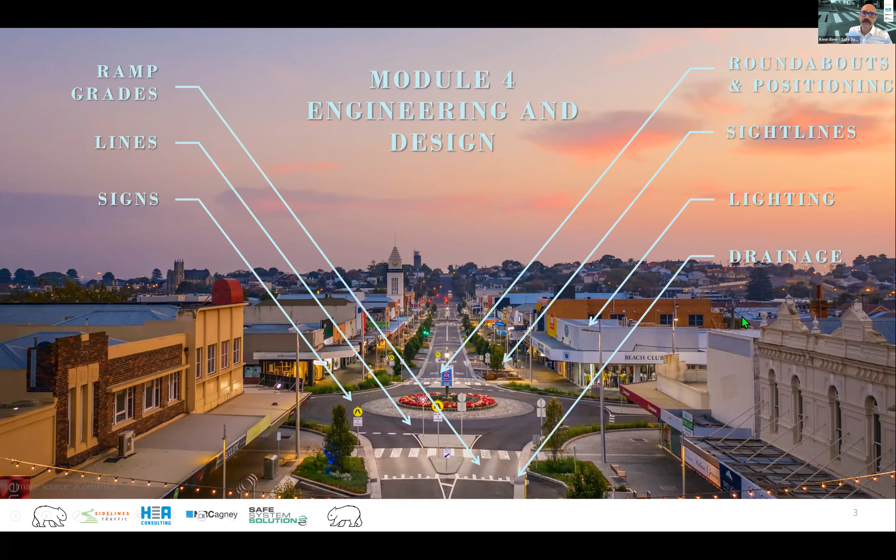Okay, so overarching, and this is a bit of a reminder of what my three colleagues have beautifully outlined there. In general, our design objectives are to locate crossings on pedestrian and cyclist desire lines, and that they serve the road users through efficient and effective crossing. We want them to be able to be traversed by all path users. We want them to have high alignment with safe system principles, and we want to consider it at that network level. So there's a sort of your design objectives.

But if we get into design principles, this is where I start to challenge industry on often. And you'll see there, I start with severity, and that's been a massive change in my career. I've been doing road safety audits for 20 years or so, and I used to look at the road network solely from a likelihood perspective, or not solely, but almost solely from a likelihood perspective.

I'd be saying, oh, we've got the right sight lines, is there a see-through effect here, you know, is the lighting right, and all of these things. Right, but transitioning now, I'll be looking at the whole road network on potential energy. So I'm saying, okay, what's the speed here? What's the vulnerability of the user? What are the angles that these crashes could happen at? That's the first thing I'm thinking about, right?

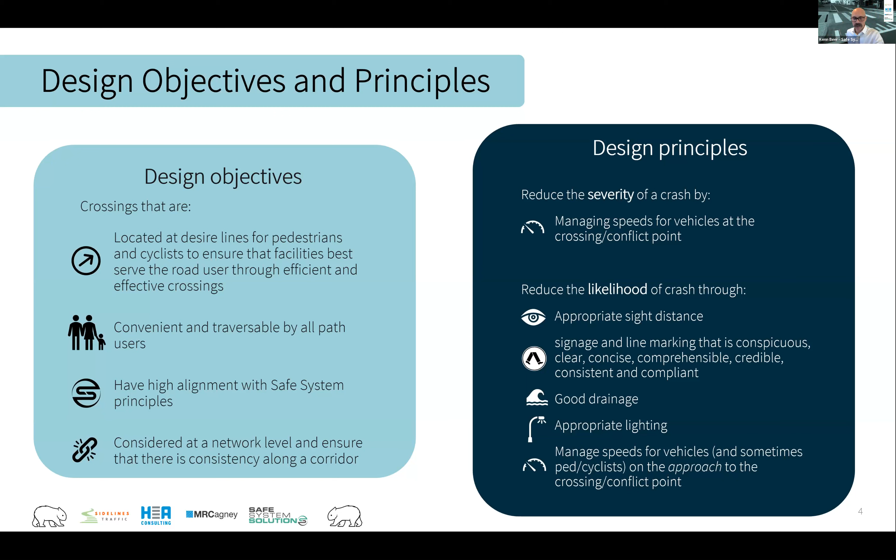So I'll be taking you through those design principles, and we will delve right into some of the detail here. And I want to start with sight distances. And I will start with a few probably thumbs up, thumbs down style things.

Let's start with this one. Okay, it's an at-grade crossing. It's not a raised crossing, but give us your thumbs up, thumbs down. Now you can do that with the icon or the scary face. If scary face is your thumbs down, or you can type it into the chat, whatever works for you.

Okay, this is interesting. Yeah, it looks like maybe like 60-40, 60 negative or more negative as we go by. So we've got two lanes going in that direction, so it's two carriageway. Oh, okay, we've got a lot of scared faces at the end. Yeah, people. There's some sort of thing going on, maybe when I said there's two lanes in that direction.

I suppose the good aspect, some people are saying there's some good, I mean, it's got lighting. The lighting's pretty good there. It is a pedestrian crossing as such. But as a few people are pointing out there, the thing that we always get concerned about with these multi-lane...

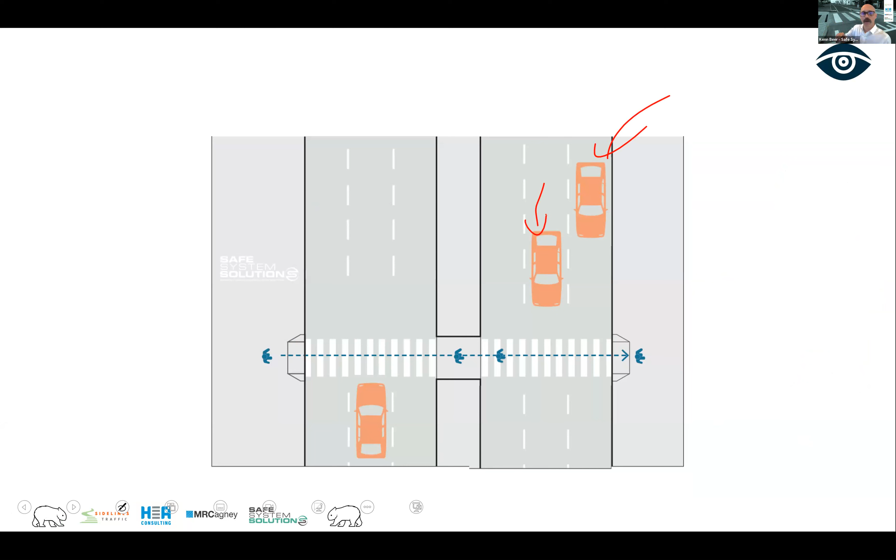in the same direction, and I use this diagram to try to explain it, is we've got... if we're thinking about this car here and it's approaching, and this car slams on the brakes because a pedestrian is crossing from the middle, we've got a sightline impediment there. Dynamic visual obstruction is what we'd call it. So that vehicle blocks that sightline.

If they're slamming on the brake and the pedestrian is walking past, we don't have the open sight lines that we wanted. Now, the Australian Standard does talk about this and says we shouldn't have pedestrian crossings on multi-lane roads like this, but it is done in jurisdictions, as you saw there. Queensland seems to have quite a few of them, and certainly there are ones in other states as well. So it's an interesting one.

But let's have a look at this one. Again, we've got two lanes in the one direction, and we've got a pedestrian crossing there. Yeah, so it's another divided carriageway there. Let's see, thumbs up, thumbs down.

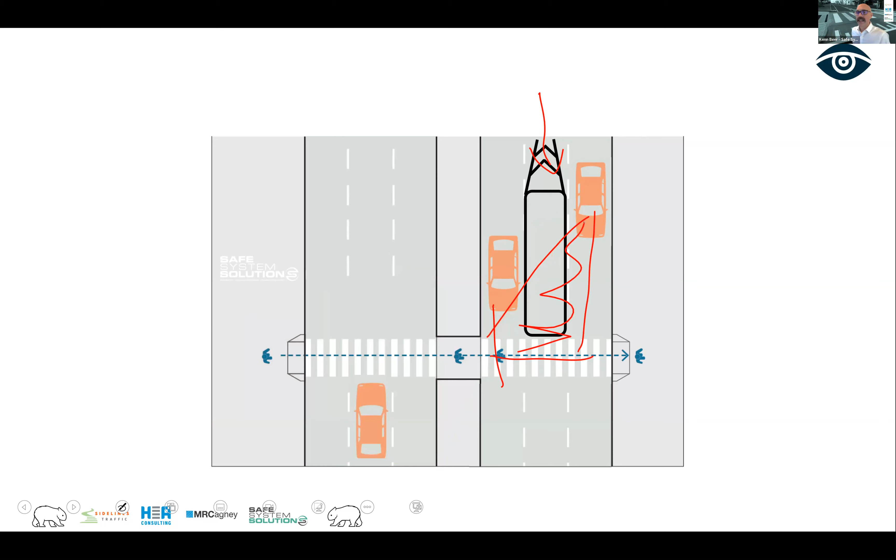The other beautiful thing about this one is the raised nature of it. We've slowed things down—there is more time to see, to react, and so your sight triangles are lessened. It's a really neat way to do it. That one's down in the Port Melbourne area, just near the pier there—Station Pier, is it?

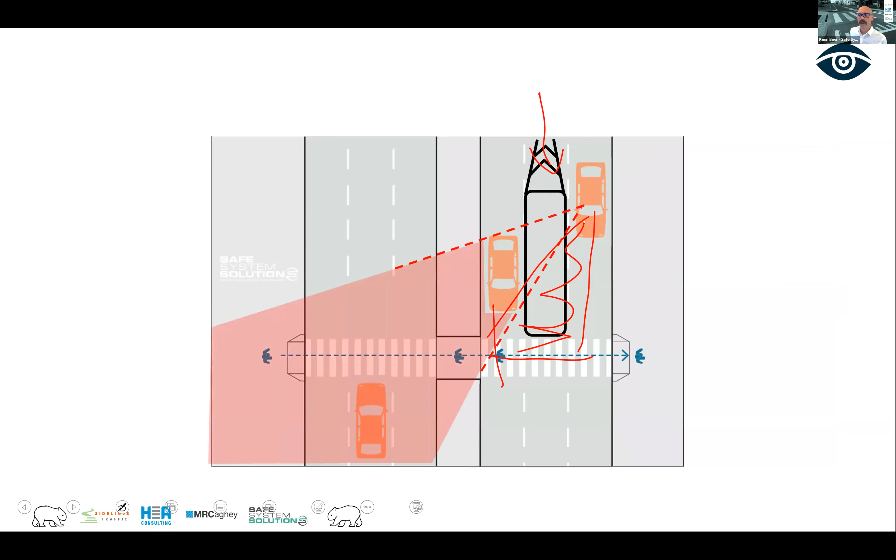Okay, let's keep moving on. Let's get into a bit of, I suppose, technical detail around sight distances to crossings. To do this, we want to take a few standard variables that we use in this.

A few things I'll be using a little bit later on: 1.2 meters a second as a walking speed—it's taken as a bit of an average walking speed. Now, you would adjust that hypothetically here—if it was a park and there was a path that led directly up to this crossing, you'd have to think, okay, there will likely be joggers and people moving along faster, so we might need to up that a bit. But this is kind of what we think about in a normal environment where there's a footpath and a crossing and these sorts of things.

1.6 meter setback is a really important number used in raised crossings or any crossing sight distance thinking. It's an appropriate point for pedestrian setback, and I'll come back to that. And I've got a 1.07 for height that we're thinking about for children or people in wheelchairs. It's very precise, whoever came up with 1.07, but hey, it's there—it's used in a lot of the documentation.

Now, here is what I'd say is a big common mistake, especially made by local governments. Designers will often simply revert back to this bit in the road rules that says a driver must not stop on a pedestrian crossing not at an intersection, or on the road within 20 meters before the crossing, 10 meters after the crossing. And they say, well, that 20 meters, as you can see down here, is there to open sight lines—that was the purpose of that road rule, so that's got to be fine. In New Zealand, for those logging in over the ditch, it's 6 meters.

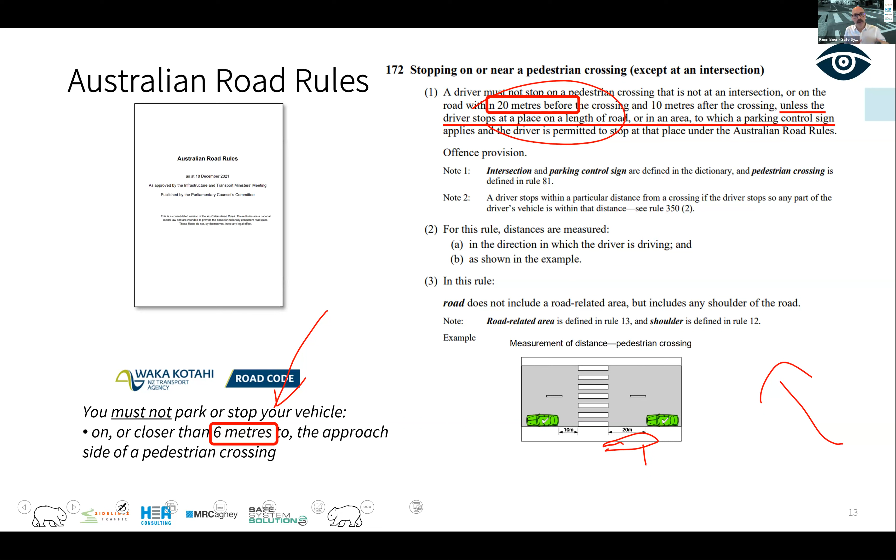So let me tell you how you should be doing it from first principles in terms of sight distance on the approach to different crossing types. You use your stopping sight distance calculations, or safe intersection sight distance calculations - same thing, just at a different height - SSD. You've got a vehicle approaching, you go 1.6 meter setback, and then you want to have that sight triangle clear. What distance back are we talking for that vehicle?

Well, that's going to depend, as per the formula, on what is the free flow speed, the 85th percentile speed. Let's say it's 50, maybe they're coming in at. Okay, we take our reaction time - I'll look at the environment we're in, but the bulk of the time it's going to be 1.5. Reaction time will be quick because pedestrian crossings are put in places where there's stuff going on. They're not out in the middle of nowhere where people have been driving for 4 hours, so reaction time is going to be good. So I drop almost always to 1.5.

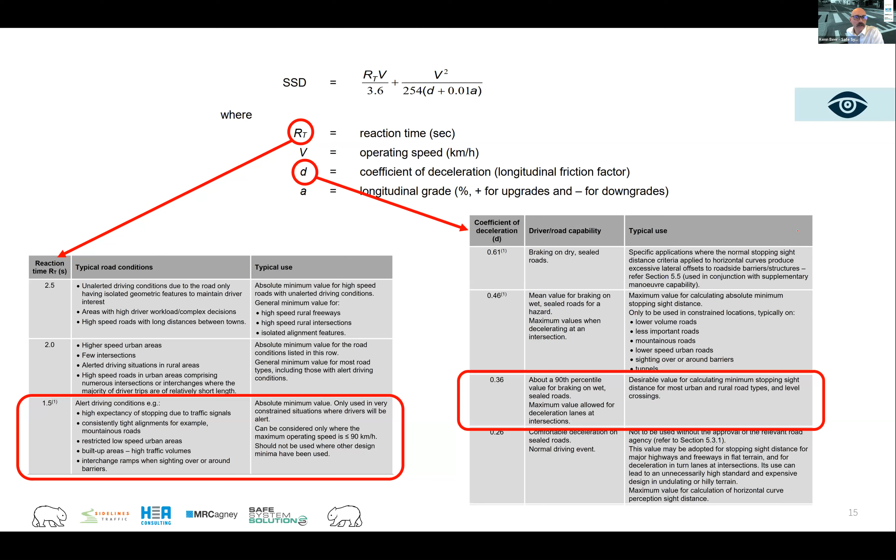In terms of your coefficient of deceleration, which is that other key choice you're making, 0.36 is good because it's factoring in wet road and 90th percentile. If you go less than that, there are situations where it might not give us the best safety potentially. So you've got those. If you've got a longitudinal grade, you'll factor that in, and you've got operating speed. So you plug that through your calculation.

And you'll see there that we then get, say, 48 meters at that 50 coming in. I mean, that's a fair distance, and you'll work out where you can put the parking then and the like. So that's how we do that.

But this is an at-grade crossing, isn't it? We don't have any raised elements to this. So how does it work then if we actually raise the crossing? Well, a lot of people just stick to this formula because there's not really a lot of other guidance otherwise. But that doesn't make sense. If you just stand back and look at that, you go, well, that doesn't really make sense, does it?

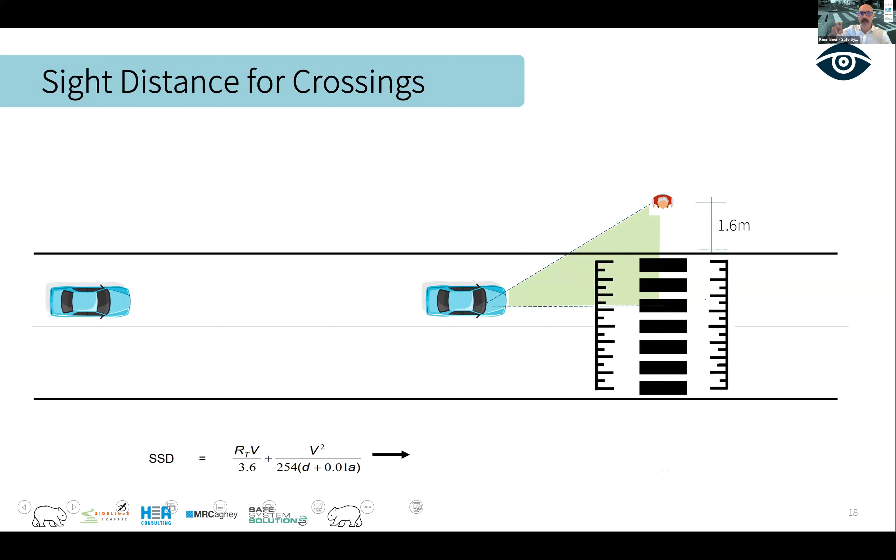Because that car will slow down. It's going to slow down because it has to navigate over what essentially is a speed hump. So what to do with that one becomes really interesting. So you can then say, well, okay, what about we take that distance and base that free flow speed off the ramp grade speed - the advisory speed we're putting on that ramp grade.

And then we're significantly going to shorten the sight distance calculation, or the distance, compared to our free flow speed back here. So you're able to really shorten up your sight triangles and hopefully get more crossings in where you may have said not to. So then you can see it's down to 17 or so there potentially.

Now, the reality of this - I've tried to explain this in a diagram here, where what happens is that a vehicle is coming in at a certain speed, let's say they're traveling at 50. ASD, approach sight distance, is ensuring that when that vehicle hits this point, they can see that they are going to potentially have to stop at that location, or they're going to have to navigate over this raised area. So we want to ensure that we've got that approach sight distance.

So they're going to process that information, and then they're going to start to slow down because they're going to have to navigate something where they don't know whether a pedestrian's there or not potentially, but they're slowing down anyway. And so we slow down, and then there's this point where they're going to make that decision as to, am I going to travel along at this appropriate speed now to navigate over this, or am I going to stop? And that's the critical decision making. Now, what happens at this location is the driver already has their foot resting on the brake because they are slowing down.

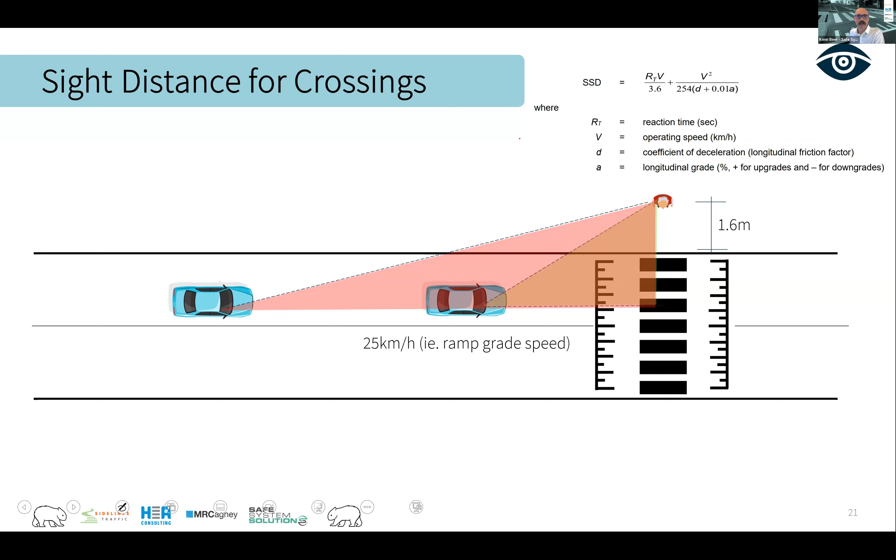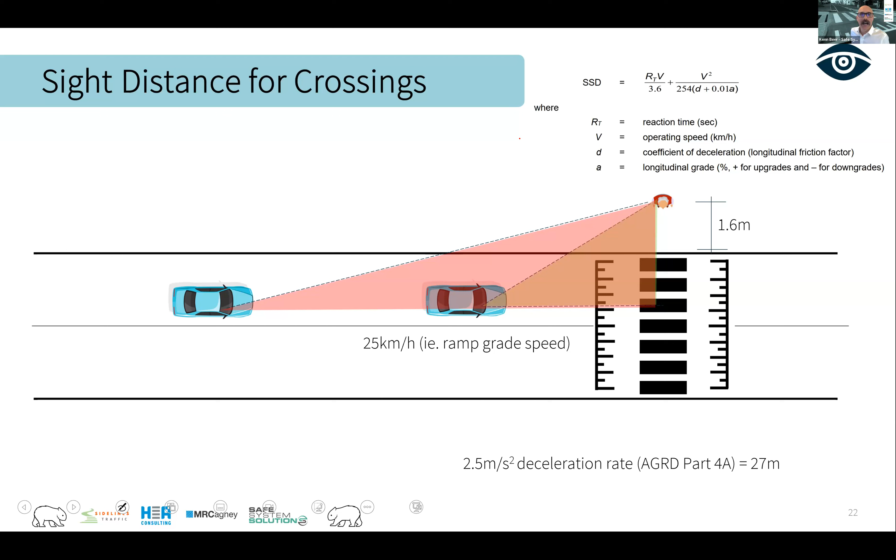It's all based on a 2.5 meters a second deceleration, which is out of Australian Guide to Road Design Part 4A. I don't need to go into that now. Okay, I'll take any questions in a minute there, Hafez, if they're coming in.

I just want to cover this off because some people ask, why aren't we then, there is a requirement to give way at this location, which in theory should be no different to approaching a road you don't have priority on. So why aren't we just looking for gap sight distance, like enough sight distance that this vehicle has stopped here, they're looking, have we got enough gap, and then I'll make my move. The answer is that people don't drive approaching a pedestrian crossing the way they do approaching a non-priority intersection. They approach it like it's a speed hump, and then they will make a stopping decision if the pedestrian is there that they see. I think that has covered that.

I'll pause there for questions, if there's anything I need to deal with.

100%. So SUVs, as you know, have been on the rise with several implications for pedestrians, so what are your thoughts on how that phenomenon impacts your design?

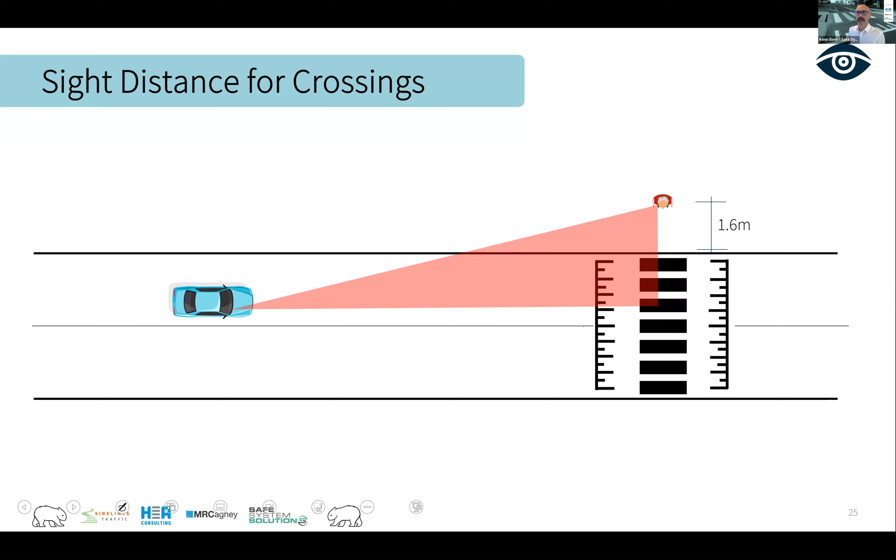One that came in very early, and I really love, is the curb outstand, or curb build out if you're in New Zealand. You immediately open up better sight lines, don't you? Because that 1.6 meters is all of a sudden pushed in as much as you possibly can there. So you're really able to do some wonderful things with those curb build outs.

But then I really do like these thoughts people are having about, well, hang on a second, I understand the principles you're talking about there. So if we could slow that vehicle, as Hafez said, we can slow them down earlier on, we can really get some good... we can tighten things up. Now, I will show you an example, a picture of that later. I thought it was the next slide, but it's not. I just want to cover off another principle, and then I'll show you some pictures of how you can slow vehicles on the approach.

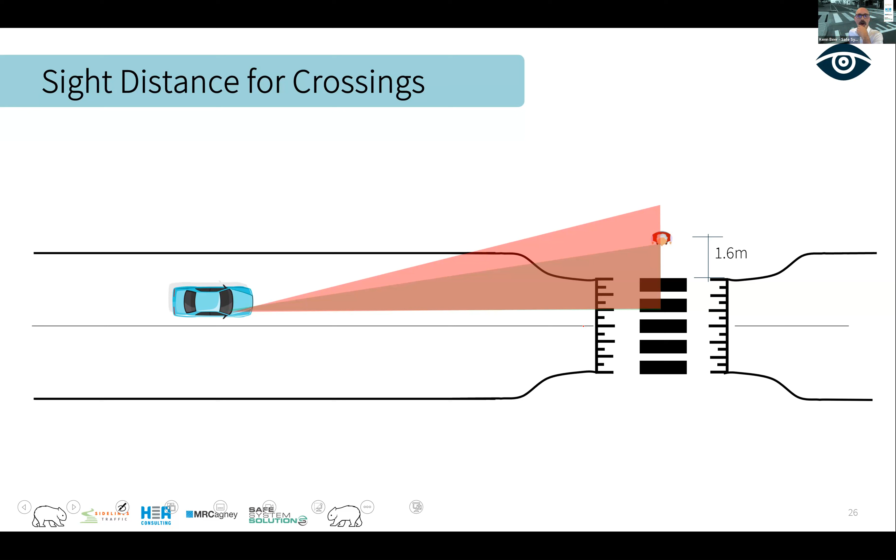And really great to see some of the ideas there, humps, cushions, narrowing the road even to bring operating speeds down, all good stuff. But here's, I think, an amazingly important principle that we can utilize design specifics on.

Okay, what we've been talking about there is sight distance for a vehicle to see a pedestrian. The pedestrian steps out, the vehicle has to give way. That's what a raised crossing is. In situations where it's not pedestrian priority, the vehicle has priority. What we use is crossing sight distance.

Now, crossing sight distance is all about a pedestrian having time to see a vehicle, pick a gap, and scurry across the road, and we take then that speed that we had for walking. So we've got that 1.2 meters a second as the walking speed there, and we've got our other detail in there. It might be say 65 meters or something like that with a 40. So what we're saying there is that it's actually this distance that a pedestrian needs to be able to pick their gap and move across the road.

So in these situations, we often cannot meet that where there's a crossing point, a pedestrian refuge, or these sort of things.

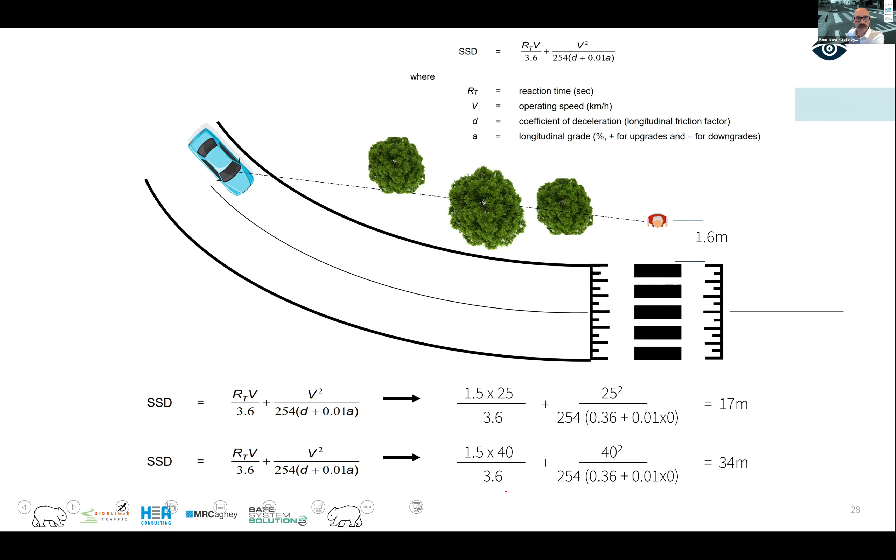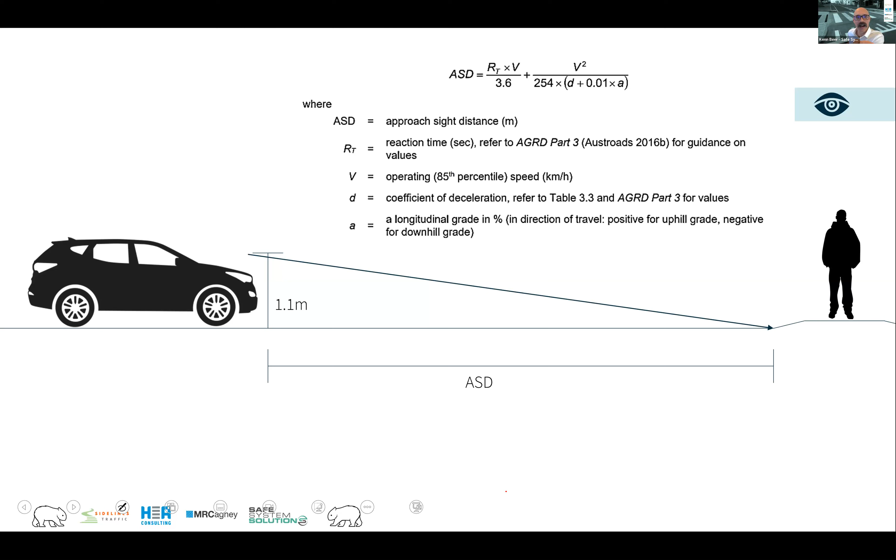If we put a pedestrian priority raised crossing in these locations, we can absolutely meet a lot of the requirements. We may not be able to meet the sight triangle calculation, but we can usually definitely meet approach sight distance, thus giving the driver the awareness that the crossing is there. So in these sort of situations, we're able to have that driver approaching realize that there's a crossing there, and we'll show you some other measures we could do to address the car.

So what we've done there is taken a situation where our pedestrian absolutely does not have enough time to look, to make a judgment call, to pick a gap, to scurry across the road, to a point where a vehicle approaching can absolutely identify that there's a crossing, knows that, has appropriate stopping approach sight distance. So we're in a much safer position by having pedestrian priority on a raised crossing than we are having pedestrians trying to make their own run across the road. Plus all of those other equity and things that Bridget talked about.

Think about old people, yeah. So it's a really big win, and we can really start to sort of justify that.

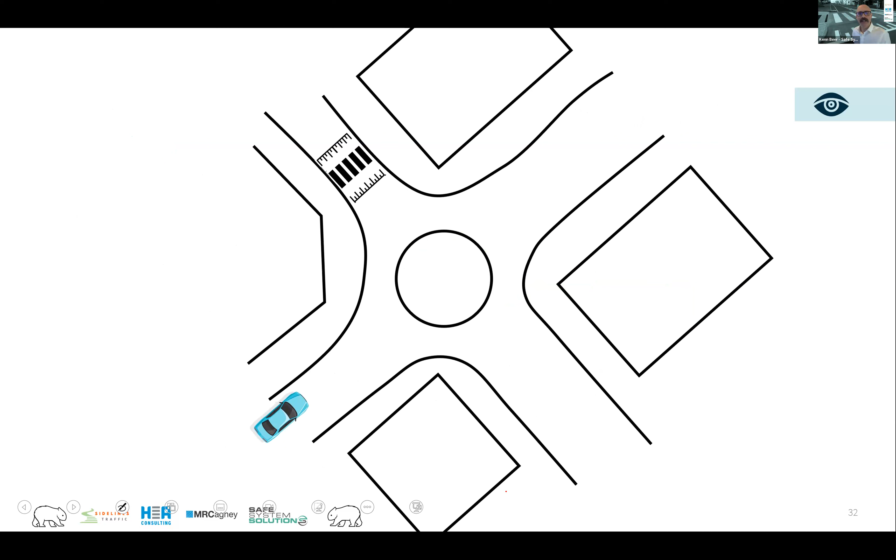Plus, the other thing is that you usually would do these in all approaches, which brings down that speed people are turning anyway. So I think that not meeting sight lines to a pedestrian crossing in some of these locations isn't a satisfactory reason, or you just got to calculate it and think about it slightly different to ensure we can provide this safe and effective access for pedestrians.

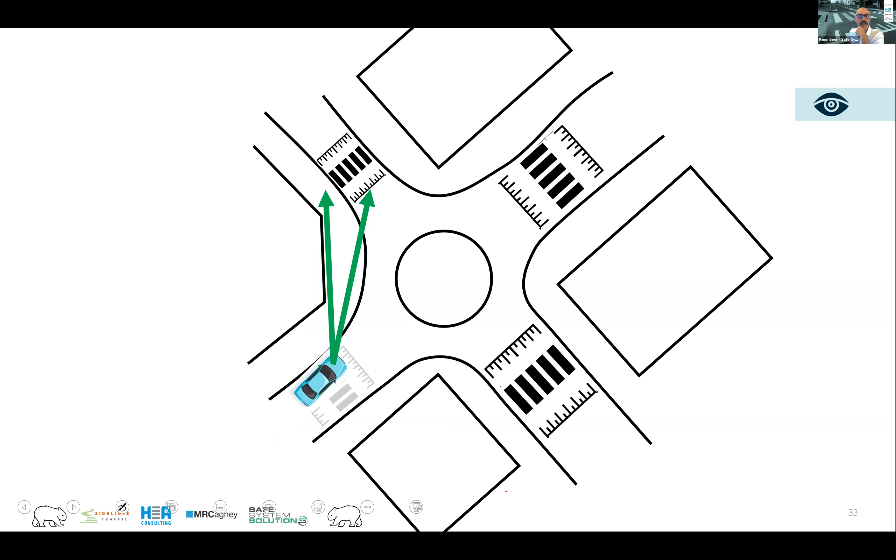Let's have a look at this one. What do we think here? Okay, now ignore the 'not in use' signs on the flashing lights, they just haven't been switched on yet. I was doing a post-opening road safety audit with a colleague on this one. Give us a thumbs up or a thumbs down.

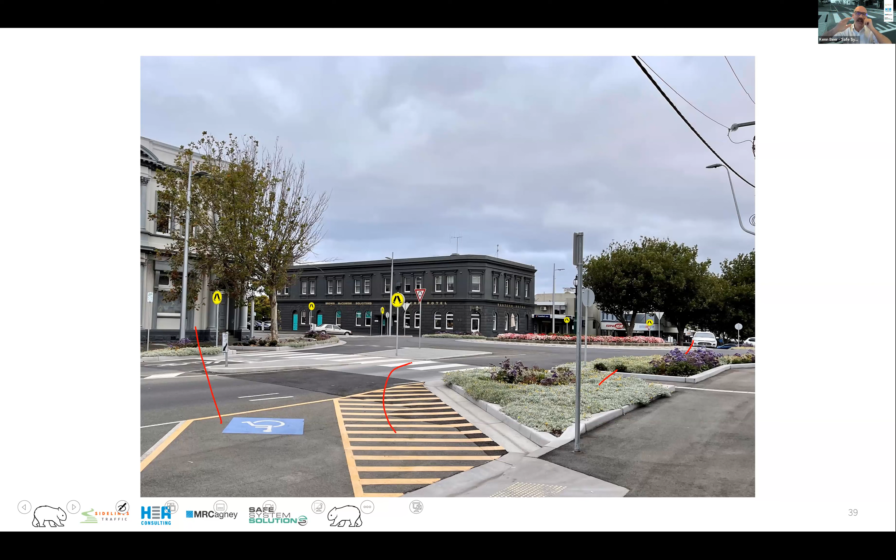You can see some beautiful vegetation there, which is nice low stuff. This is a neat way when you've got angle parking near a crossing - you don't want people backing out over the crossing. It's not a major safety issue, but it's annoying when they go into the crossing and people have to go around. So I love that they put disabled parking there, which gives a buffer, and you're not going to get as much crossing there. A nice little choice on what to put at that location.

Okay, but I've been talking about pedestrians. Oh fair, so I promised I'd answer questions. One specific question: the V in your formula, is it the approaching speed or speed at the pedestrian crossing? It's the approach speed.

One of the comments here is about cyclists going along the road, and when you narrow the road, there may be implications for their safety. What are your thoughts on narrowing and cycling mobility and safety?

That's especially the case when we do curb outstands or curb build-outs and other narrowing features. So I love a cyclist bypass lane, and I'll show you some examples of that shortly. If you can have it so that vehicles are squeezed up, but cyclists have an unimpeded flow outside that, beautiful - that works well.

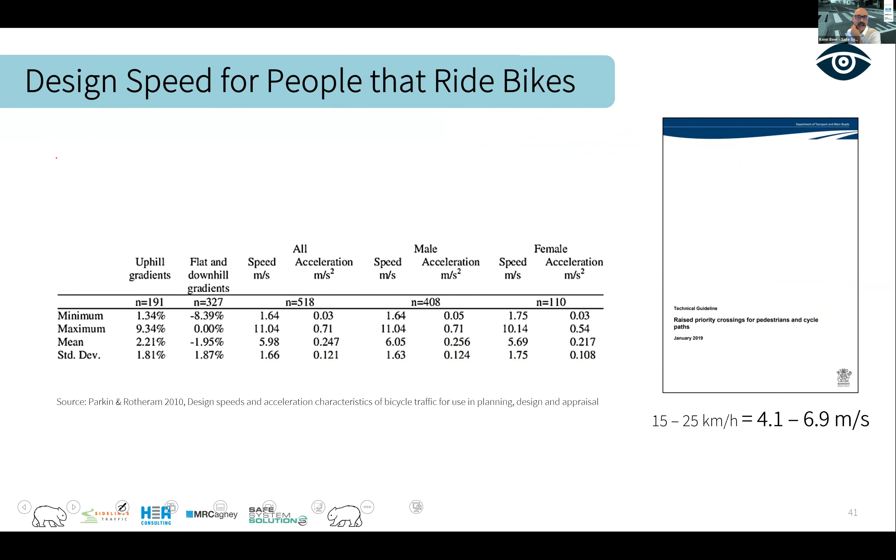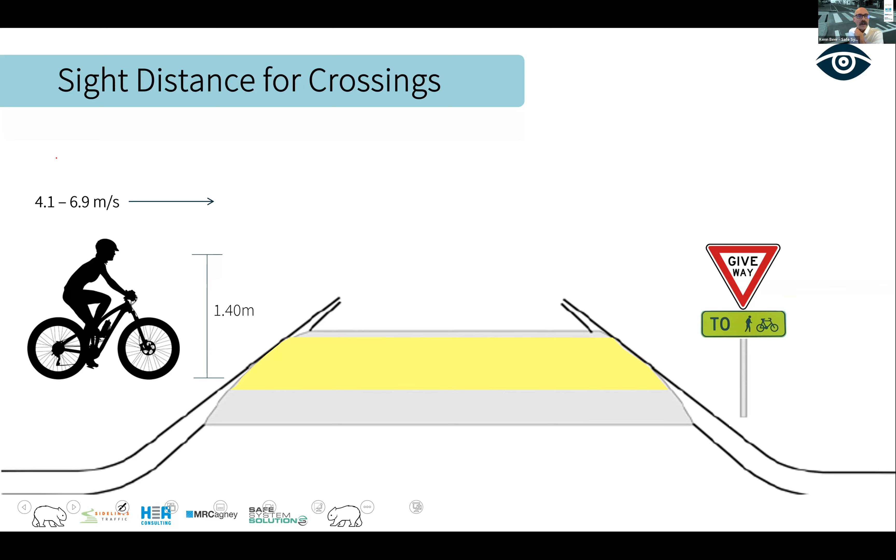TMR's done some good stuff on this, with nice information at 4.1 to 6.9 meters a second. But I'll take you through some stuff around sightlines. The Victorian government has released a really good document on considerations for these crossings, and they've done the sight lines as good as anybody I've ever seen. So I'm going to use that to explain the principles. In other jurisdictions, the principles are very sound. Queensland has released other principles which scale some things back, which are interesting. I'll point you to those as well.

I think there's lots of questions coming in. I think people are answering each other's questions as well, which is great. That's good, I'll log off. I'll log off, keep going, people.

Your current picture addresses some of the questions. There's a comment about Sharrows. I mean, that's the shared bike and vehicle symbol on the road, just to indicate the point where that vehicle might be approaching and the cyclist might be coming in. So you put your Sharrow just after that speed cushion I talked about, so they know that's the point where the cyclist might be emerging.

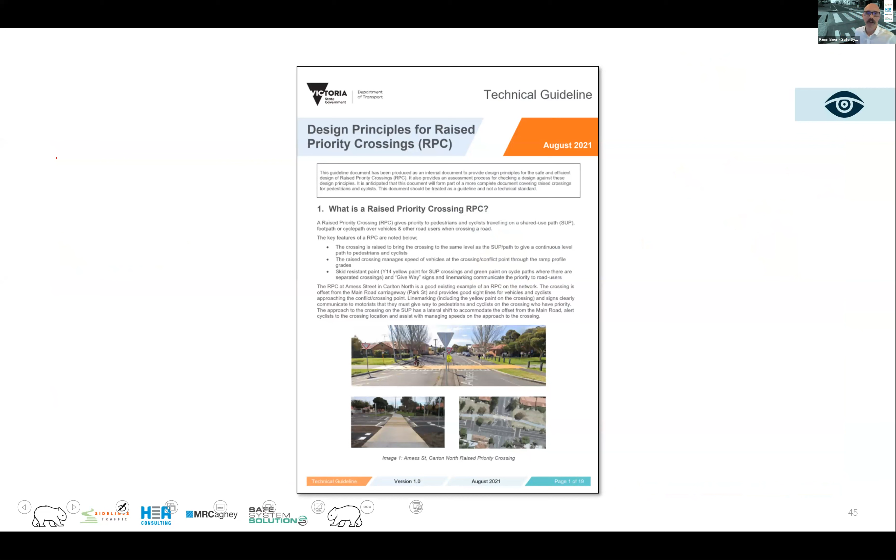I point you at this technical note, I think it's really good. In some little aspects, it's a bit conservative, but that's okay. I think somebody's gone to the effort of actually documenting how to think about these raised priority crossings really well. TMR has a really good document on this as well, you should have a look at that. But I'm going to talk to you about how you think about sightline requirements at these types of crossings.

The fundamental principle is that we want to think of it more as sight lines kind of at a roundabout, in the sense that you want mutual sightline ability there for both the cyclist and the driver to be able to see and make a judgment about what's going to happen. Now, in order to do this, we set ourselves what we call a travel time. The travel time is that observation and reaction for both users - so it's a time we're talking about here. For a vehicle, the time to see and react, and for a bike rider as well.

So then there are some scenarios here. If you're in these very high speed environments, we're talking about 70, 80 kilometer roads, there we're thinking we want high travel time allocation. Low environments or really constrained scenarios where you can't meet these, you might be down to 2 seconds.

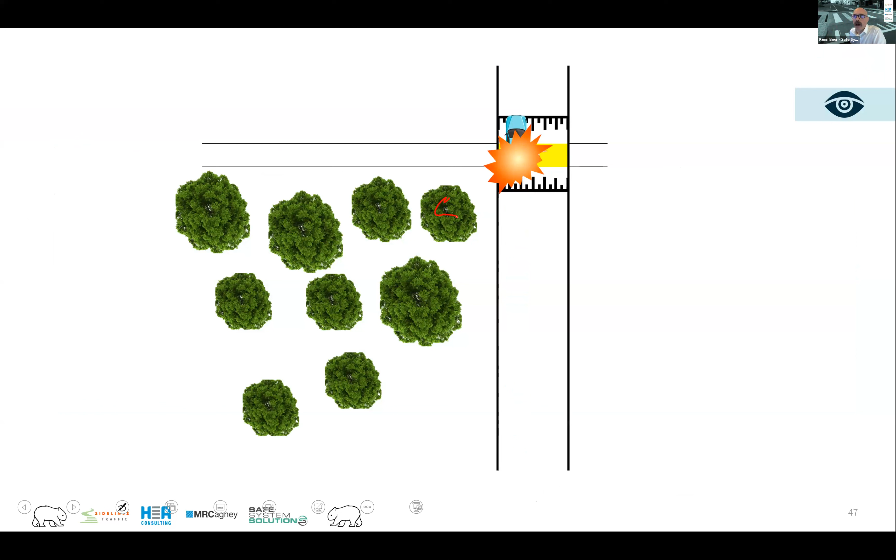Just to ensure everybody's on the same page here, if we've got these scenarios, we don't have good sight lines, we've got very constrained trees or buildings or things bunched up in there, you're going to have this issue where maybe the driver goes through, we've got a faster moving vehicle and we've got a crash. We want to ensure some sort of sight triangle there opened up like this.

So we have two options: where what's going to happen is that the vehicle nicely slows down, stops, and the bike rider goes through as per the road rule requirements and the way it should operate. But we also want to cover this scenario where that car does not stop or enters through the crossing, but the bike rider has enough time to react and evade.

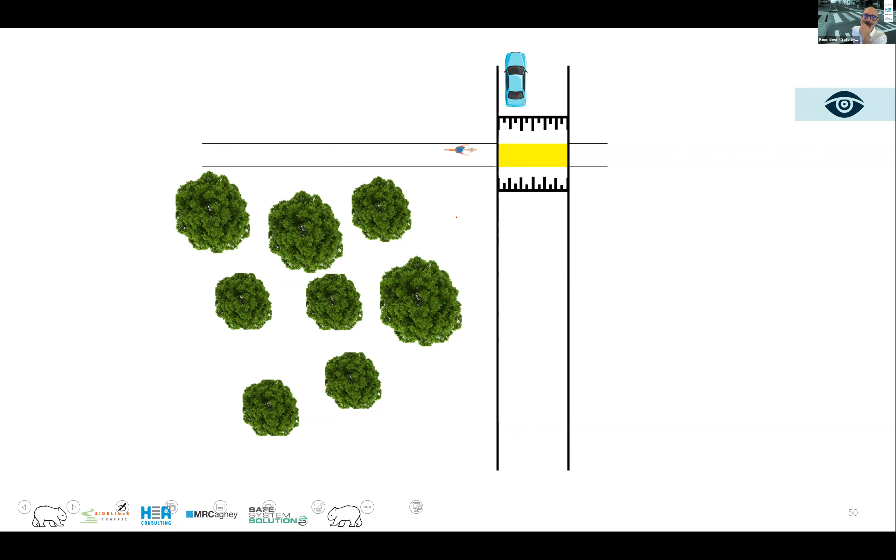So I'm going to show you sort of how to calculate this and work this out, because now we're adding that variable of speed of the cyclist into the equation. Back before we had that 1.6 setback, which took it all into account.

But in these situations, maybe we've got a shared path that's running along the side of a major road. And that's really common because you've got a bit of land space there, you run your shared path along that. It's an arterial road or something, so you don't want bikes mixing in there. But how do we then work out what we've got to do?

Well, we want that vehicle there to be able to see a cyclist approaching the crossing. We want them to be able to see the conflict point, and we want them to see a bike rider approaching from the other direction. Okay, at some point back B and at some distance back A.

We want the same at these locations, and I'm just going to draw you a sight envelope in this. So there we have it. That's the area we're trying to keep free of major sightline impediments. So you might still have a power pole or something in there, but it's major sightline impediments.

So to do this and to work out that A and that B, we're going to use that information we had before. So I'll give you another design scenario and then I'll work through the actual figures on it.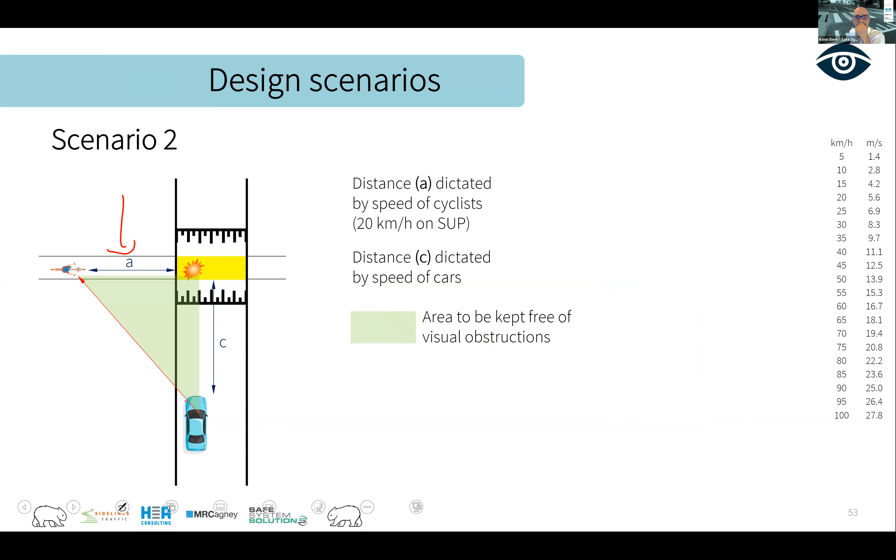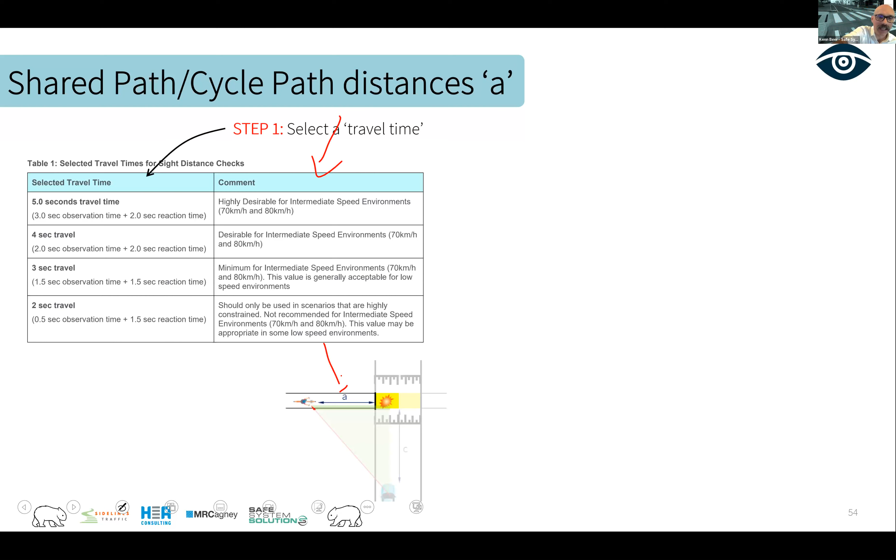So remember I said we've got to select this travel time scenario, and it's based on these scenarios. So you pick one of those. Select a travel time based on these scenarios. And then we're trying to work out A there. What is that A? How do we get that distance back where we're going to plonk the cyclist in our sightline calculation?

Well, you use this table 2 out of the RDN - it's a really good gauge of doing it. You can do all of this back from first principles if you want, but it's been done for you, which is very handy.

So you pick whatever your travel time is, and then you say, okay, what speed is that bike rider going to be approaching at? What do you think they're going to be coming in at? Now you can see there we've got 30, 25, 20, or 15 in this scenario.

Okay, and this is your judgment call. Again, if it is a bike facility only, or it's got a big bulk of bikes and they're all going fast, you might be up in that 30 and be allocating that. Certainly if it's just a cycleway in its absolute own right, then yeah, you're up at 30 because you're going to be taking that into account.

And that's moving for a cyclist. Hafez is answering stuff on e-bikes and their speeds, but up around that 30, they're moving along pretty quick, right?

If you've got low speed environments, or a really interesting geometry on the approach to the point that slows riders down on the bike, you can be down at the sort of level of 15 or so. You simply say, well, I've selected a travel time of 3 seconds based on some scenario, and I'm going to go with 20 on the approach speed, which is often done, and we know it's a 17 meter setback for the bike - that's for A.

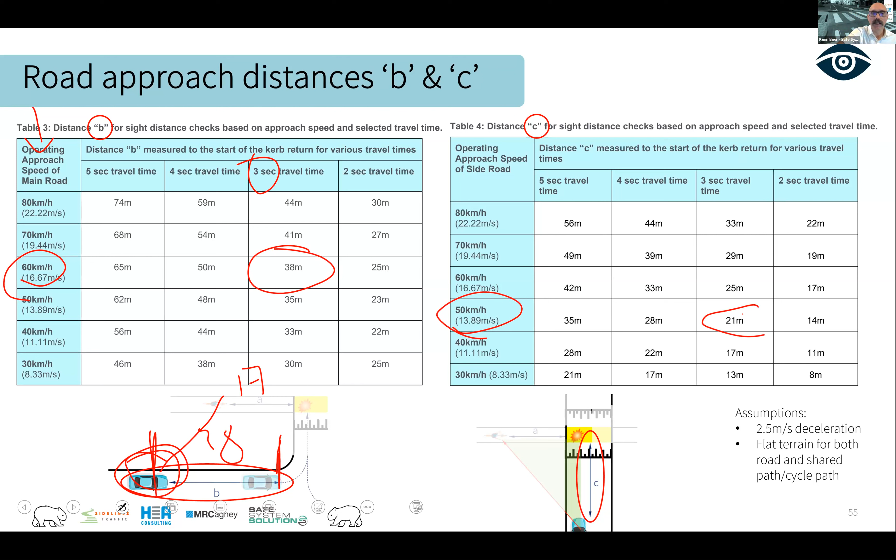And then you've got the point where you need to be looking to keep those things clear. Then C, you've got this one - approaching at whatever speed, 50, and 3 down to 21 there, for example. So I hope that's giving you some ideas on the principles of it. You can see 20 is a common one on bike speed, and then you've got whatever speed you're approaching, which you may actually reduce down based on having some

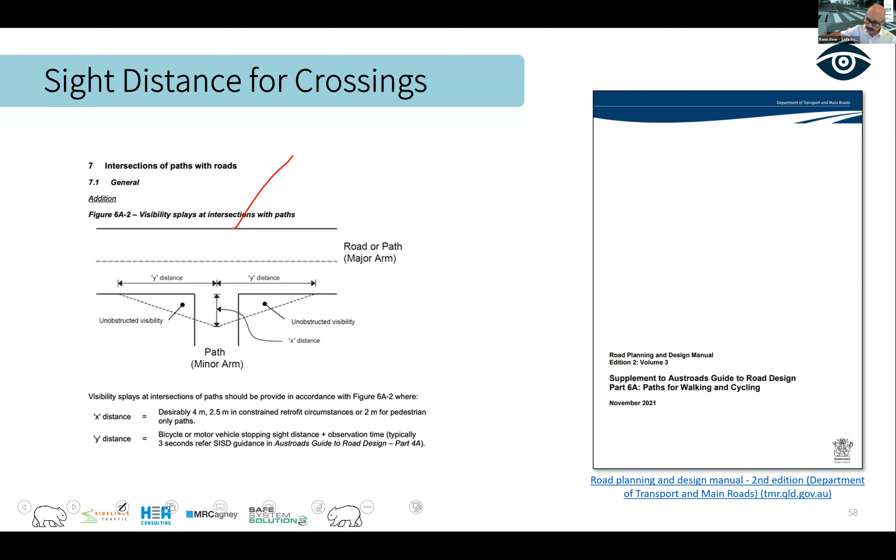of those raised facilities as well. So TMR's got a number of different guidance documents. I think they've done some really good work on it. They've got interesting stuff around shared paths meeting each other and shared paths meeting roads and the like, essentially talking about a setback of 4 meters and 2.5 in constrained situations, which is pushing a bit further than some of that Victorian guidance if you run with that.

Questions, and I'm going to be asking the group this one. Again, what if we can't meet some of those visibility requirements for these scenarios where we've got shared paths crossing roads? So Hafez, questions for me while people ponder that as well?

A couple of quick ones. So table 1 and 2 that you showed, where can people find the data on them? Are they in the VicRoads design notes? Yep, they're in the road design note, and I've put that into the learning management system folder of resources, and I'll show you that at the end. You could just Google it if you wanted, but that's certainly there.

And there's a question from Alison here - wouldn't it be better to design for the fastest speed when we're designing? And maybe I'll complement that by asking, can we also manage the speed of bicycles if we cannot cater for them? So to answer Alison's question, in an ideal world, yes, you would be doing that. If you had an absolute greenfield site and the freedom to design things with lots of funding, and they're not asking you to minimize land take and all of these, absolutely, that's great.

The bulk of scenarios are in brownfield sites. It's really hard and ugly to try to do this, and there's pressures on cost and all of these other sorts of things. So you're making that call to ensure that you can get it in. If we said cater for the faster cyclists and always do it, what we would probably end ourselves up in is a situation where we wouldn't be giving cyclists and pedestrians priority, because you just wouldn't actually be able to do it. There'd be a building in the way, there'd be these sort of things.

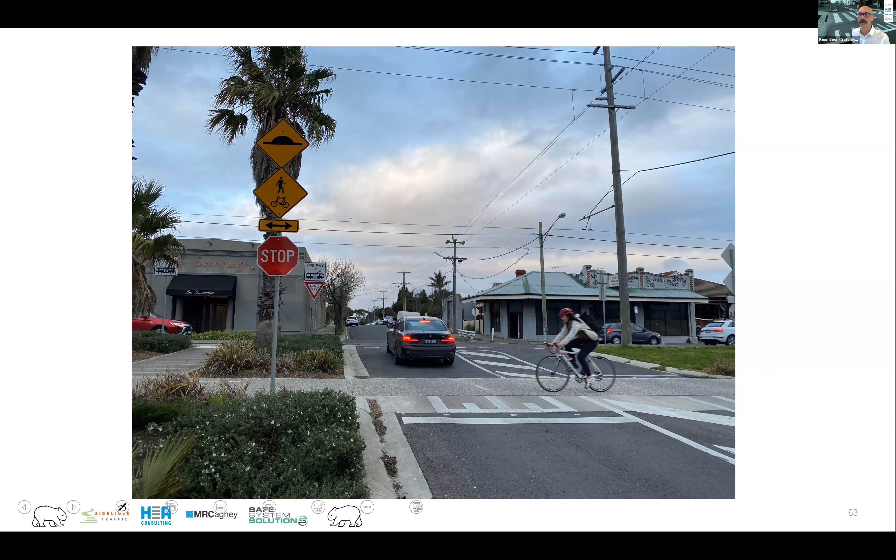I'll pause there, Fez, see if there's anything else I need to talk to. I mean, I talked the whole two hours on sightlines, and it looks like I've already done an hour on this. Yeah, I think we're safe, and considering we have so much other material, maybe I suggest we continue, and we have other topics, yeah?

Let's go. Okay, so let's talk about roundabouts, positioning of raised crossings around roundabouts. I talked a little bit about that before, associated with sight lines and the like. But really there's two options you have in positioning. One is to put it right up on the hold line, as you see there, option one.

Option two is associated with setting back about 5 to 8 meters. It's essentially a car length, I suppose, is what you're trying to set it back to, about a car length. Now, you can see in my little diagrams, if you have it right up on the hold line, you've got the issue where pedestrians crossing will be blocking vehicles, which means other vehicles can't circulate. The circulating carriageway will be blocked by vehicles.

Now, you may not have a problem with that, and there's lots of environments out there where we'd say, well, pedestrians are priority, and who cares if it's no good for cars, because they shouldn't be in this area. If they are, they're going slow and they're not going to have a good time, they should walk or ride a bike. So that's fine, you can do that.

This one has that circulating area, so at least one vehicle can be propped, waiting as pedestrians cross, and other vehicles can circulate around. But the other advantage, I suppose, of that setback is associated with vehicles entering the roundabout, not exiting. So you can see that when you do that, that vehicle has the ability to navigate over the pedestrian crossing and pause there. But we often find that when you put it right up on the hold line, vehicles are sitting right across your crossing as they wait.

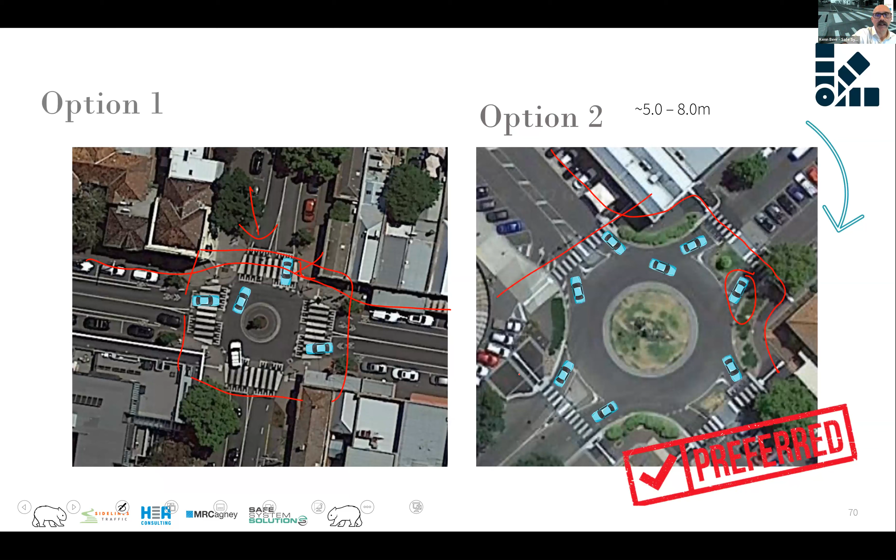The other one, there's a couple of other things on this. I mean, this is closer to the pedestrian desire line as well. So this one, walking them out of there and away. So there's a bit more thinking to be done with that. And also, yeah, the footprint in there is going to be larger in that other one. So all things to consider as we do this.

But one important thing I really want you to remember is that anything raised on the road network, we want to have it perpendicular to traffic as close as we can. We don't want these skewed angles where heavy vehicles are rocking as they go over it, or motorcyclists are on a bit of a lean when they go over it. So we try to make sure it's perpendicular. Think of that on your approach to the roundabout, trying to square everything up.

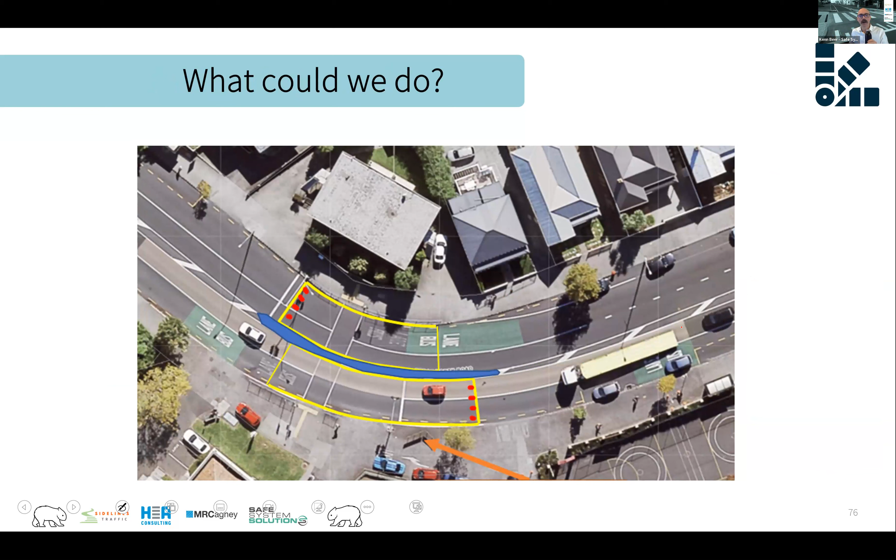So absolutely, people are getting these principles in their mind. I like the ones there of flaring it or making it wedge shaped. That's what they ended up going with to try and straighten it up. So you can see the crossing is still straight, but the actual point where the raised section is has been tried to put more squared up. But I do also like that idea, that's an aerial image of that spot where you can extend lengths of ramps and these sorts of things. Or you could look at cushions on the approach and slowing on the approach rather than just there.

Positioning of crossings and things at roundabouts. Some good documents around Australia again, VicRoads has got a good document there, the bicycle and pedestrian treatments at roundabouts. TMR sort of splits it across four, but I think there's a newer one that might consolidate a lot of that.

Okay, another one on that setback. The same principle applies when you have these paths running parallel to a road that you want to provide priority for the path. Now this one's at Bolton Street, I think, and it's an interesting one. It's that same theory of the give way sign here is actually for the shared path.

This is, they do put a hold line on these ones because it's not a pedestrian crossing. And I don't know why they picked green here, I'm not sure what's going on. That should be yellow because it is a shared path. But anyway, that must have slipped through the cracks somehow.

But you can see there's that point where a left turner can pause out of the traffic stream, or even a right turner can pause out of the traffic stream as well. So you've got that point there that they can sit there. They're not in the direct line of being struck by a through vehicle, or holding anything up, and it works really well in those situations.

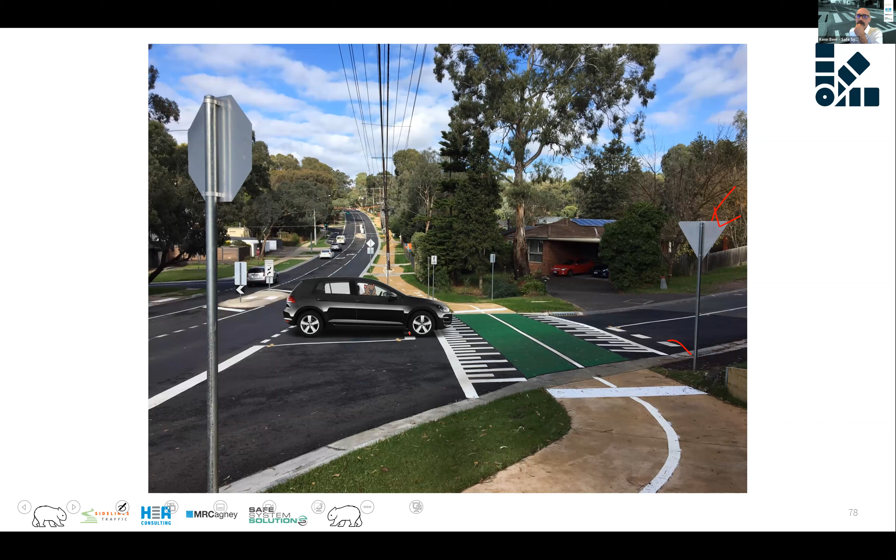And somebody doesn't like it, it's good spotting.

Unless I need to answer anything crucial there, Hafez, I might jump in and talk about ramp grades. There, look, there's you and I, Hafez, out there measuring some ramp grades. I love that day. So no questions, some observations, and I really like the people interaction in the chat room, so please keep it up.

So let's go, Kim. Right, so first of all, I'll reiterate this, I think I said it in the chat or in Prue's session: vehicles slow down on the approach to a raised thing. It is not using the raised thing to slow them down somehow, it's not a speed dampening device as such. They see it, they judge it, and they slow down. It wakes them up, right? Because they physically have to go over this thing. And then they make their judgment on what's appropriate, it's not going to damage their vehicle and not going to hurt themselves.

And then they navigate, they get that speed and they navigate over. We can affect what speed vehicles will get down to before they go over it by how sharp it is. That's partly due to them visualizing it, but it's also partly due to them doing it once and learning. And because the bulk of drivers use the same area, we can influence them by putting speed advisories.

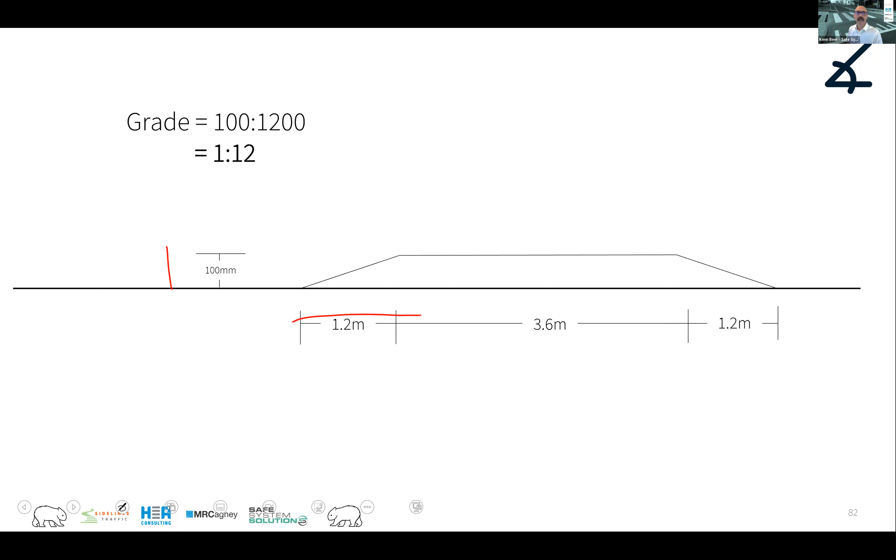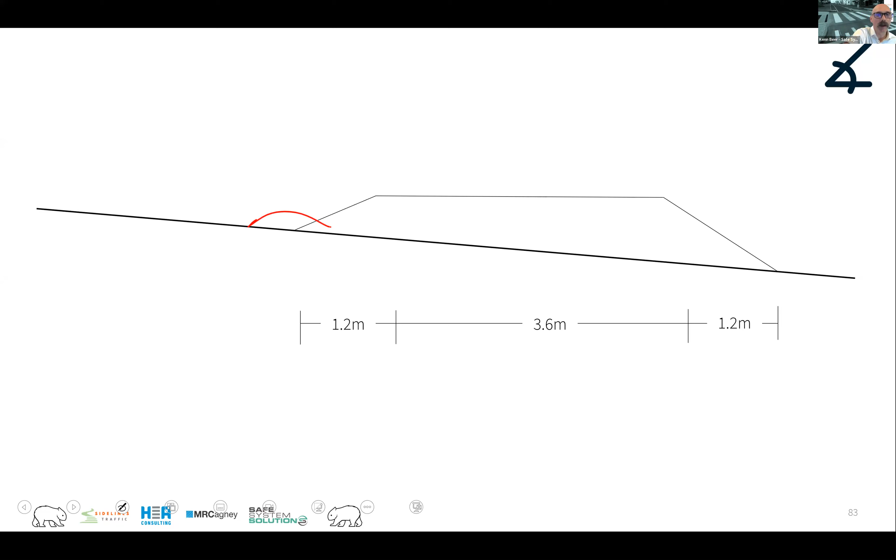Okay, so 1 in 12 ramp grade. Just be aware that your ramp grade's also going to be relative to the longitudinal grade of the road. So if you're on a steep hill, you've got to be thinking about that grade angle we're talking about there. Just pointing that out as a design consideration.

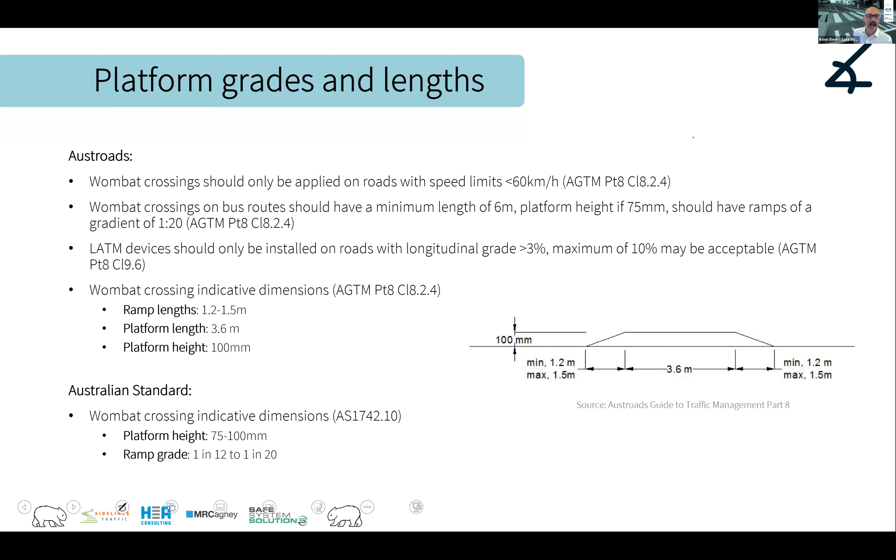Now, to save you all the hassle of trying to find out all these different things and local requirements, I've put some information in there from Austroads, the Australian standard, which has a sort of generic wombat crossing, indicative dimensions, platform heights, and the like. So those are in there.

TMR's got some specific stuff as well. TMR, desirable 100 to 150. And 150 it's high, that's a really high one. I caution you on that, not because I don't like really slowing vehicles down - I'll show you shortly why I caution you on that. And you really want to do some design thinking if you're going to go up to that height. There's some NZTA stuff in there as well, which I've put in.

You can grab that out of the notes. So we can be down as low as 50 mil, we can be up as high as 150. And then you can start to play around with the end grade you get.

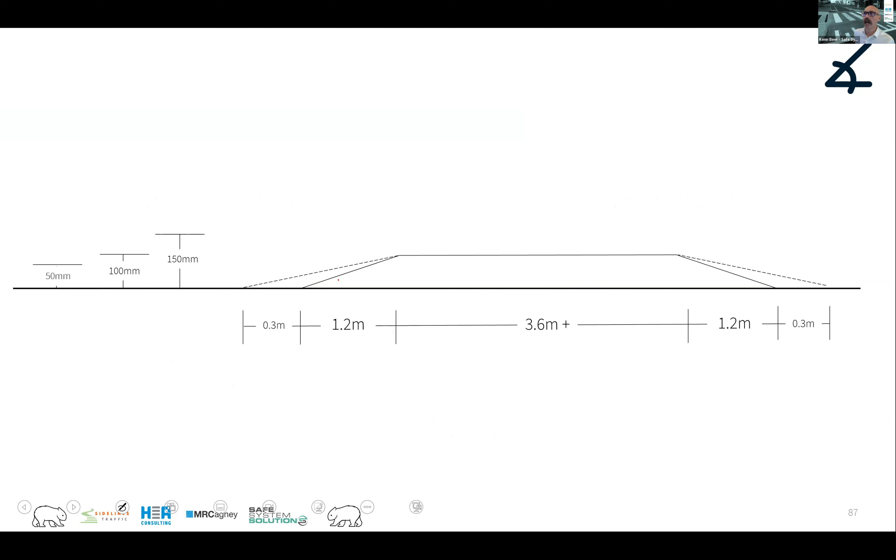So you could elongate it out that way, sticking to 100 mil high and making it longer, which would shallow it down. You could have high and short, and then we're in really steep territory, or you could flatten it out - you could have lower and flatter. And they're all going to elicit different speed responses and have other benefits.

I mean, the higher it is, the easier it is to see, the more clout it's given in terms of not vehicle hitting it, but people are going to notice - they're really going to say, yep, I'm slowing down. But the reason we can get concerned is we've got to think about all these different vehicles. And if you have a very high ramp, you're going to have front bumpers hit.

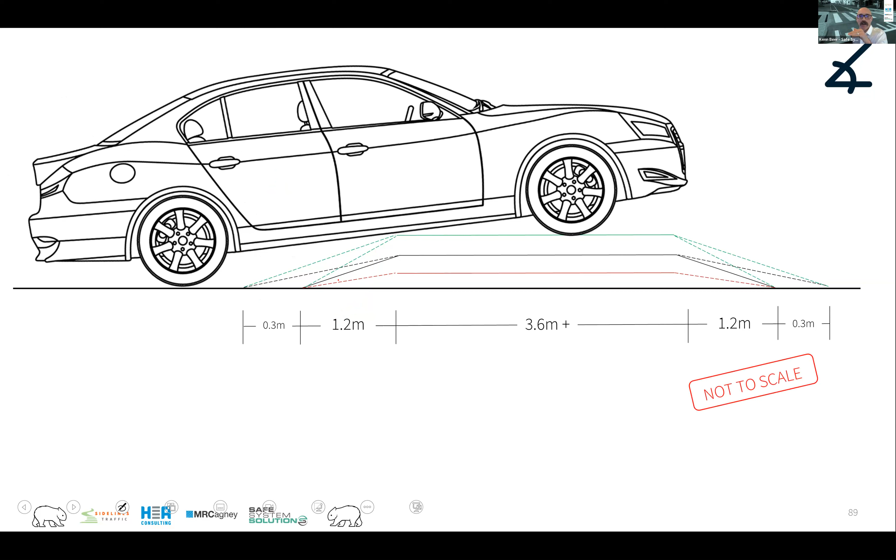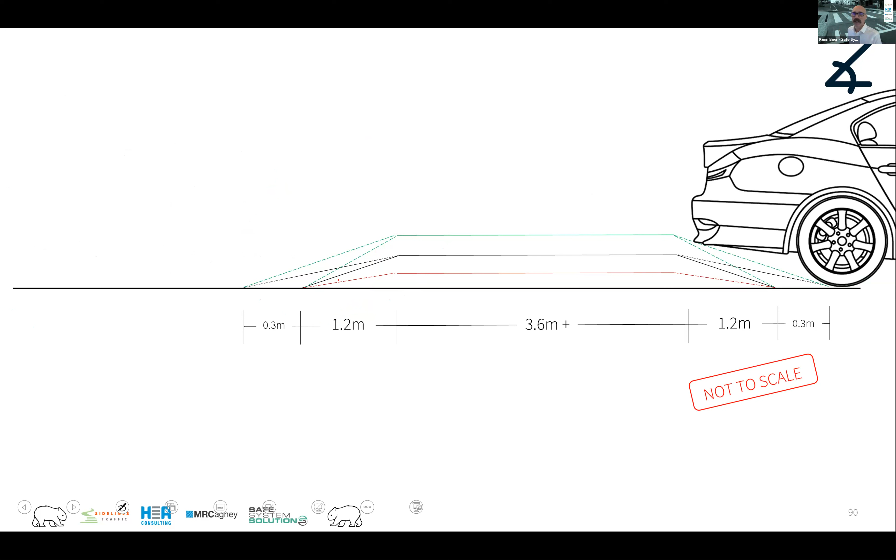It's going to bottom out as it mounts the ramp, and depending on the length of the vehicle after its rear axle, you may scrape it coming down as well. So those are sort of things you want to be considering. I'm just putting cartoony things out to explain the concept so it's hopefully understood. You might also front out coming down, depending on the grades and those sort of things.

So what we need to understand is a bit about vehicle regulations. What are we expecting vehicles to be like? Big, long, hugely long wheelbases with only 20 mil off the road surface? Well, no, we don't allow those on the network because they will get stuck on everything. So there are some minimum ground clearance requirements in vehicle regulations, and you can see 100 mil from different points is really what it is.

That becomes important for buses as well, but you're not going to get a lower vehicle lower than 100 off its axles too much. But 150 is starting to get to the point where vehicles within our acceptable vehicle design criteria will be bottoming out over humps, unless you've provided really long approach ramps and a long central surface.

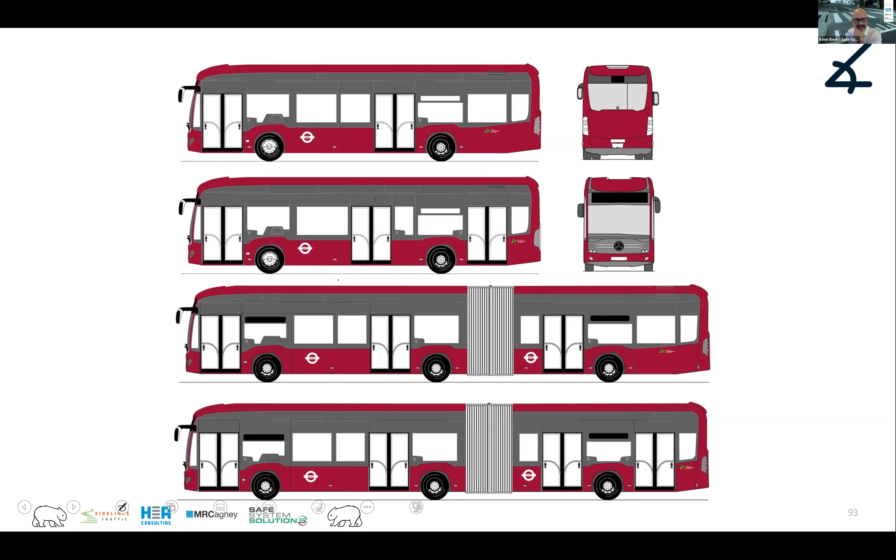But buses are one of the key ones for us to think about as we create ramp grades, heights of ramps, and lengths of platforms. So when you look at a bus and its general minimums, the 100 still sits in there as a minimum, but it's not just about the 100. It's about the distance off the axles we need to think about.

They'll always put in vehicle regulations across Australia and New Zealand that percentage off the axle you've got to think about as well. That comes into play as we try to go up and down over a ramp, with your overhang and rear hang. These absolute minimums you'd expect out of a bus, you're not going to find on your passenger buses and the like. They'll sit higher than this, but you might find a coach occasionally, or maybe a stretch limo or something like that.

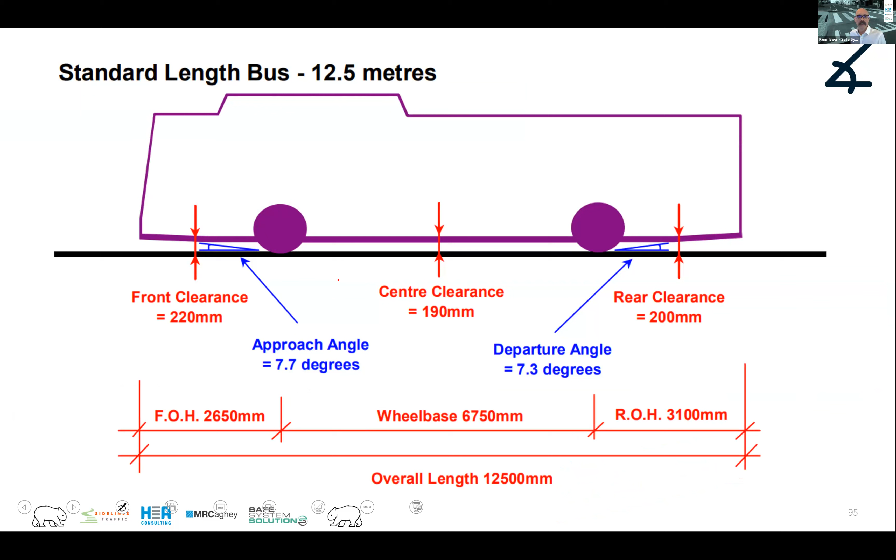And the thing is you do want to cater for that. These are standard commuter buses out of New South Wales, where we're seeing 190 clearance off the 6750 wheelbase, and 260 clearance on a longer wheelbase. Articulated buses, and you can see 200 clearance off the articulation. But the longer your wheelbase, you're going to have to go up a little bit.

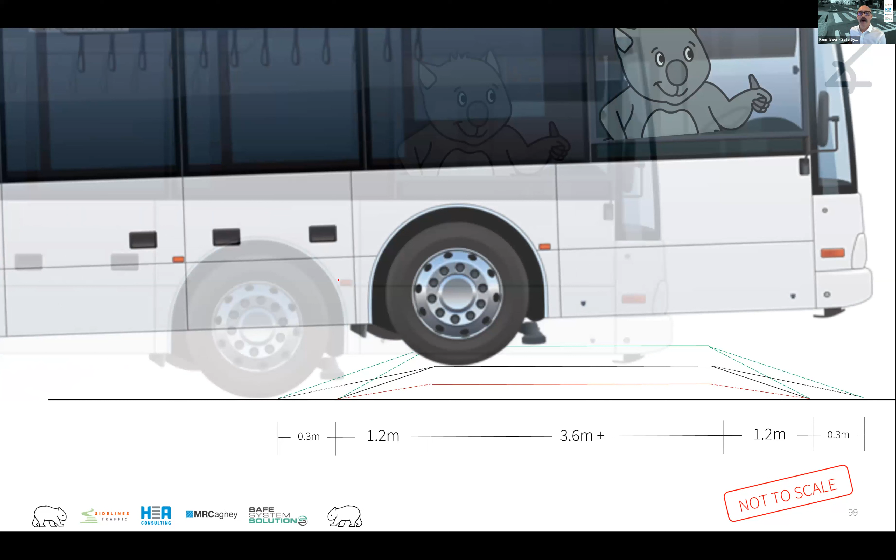But the point being, again, if we have these high ramps, there's the possibility that a coach coming into an area literally can't get its nose over it. They will hit their nose on that raised crossing, or they might bottom out over the top of it once they're over it, or scrape their back on it.

So the National Heavy Vehicle Regulator puts out some specifics around buses to help you in that design choice and thinking. Here's an example of a coach going over a 100 mil, 1 in 15 ramp grade. It's fine, the coach goes slow. If this was a route with continuous commuter buses always going through there, that might not quite be the right ramp grade and height.

However, for the occasional coach that comes to pick up the girls from school here and take them around, maybe a couple of buses a day, that's fine. Absolutely easy to navigate. Think about your longitudinal grades, okay? It changes if that's downhill into that, very different. But that's a very fine setup for all road users meeting the Australian design rules for vehicles.

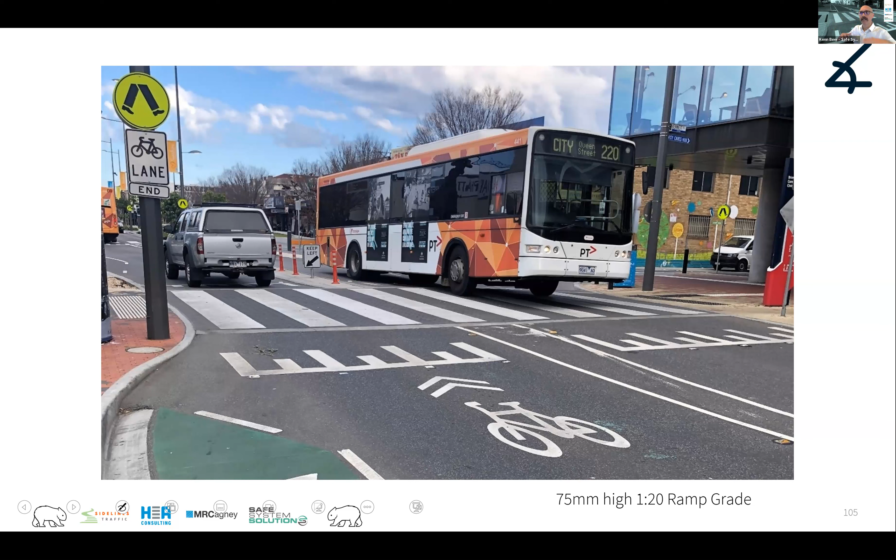If you've got commuter buses and it's a constant bus route, you might want to start adjusting your ramp grade. I think this is a nice balance here down in Sunshine, where we've got 75 high, a 1 in 20 ramp grade, it's good at slowing vehicles down. It's a generally slow speed environment anyway, and the buses are really able to navigate that quite easily. You can extend out so your whole bus gets on top of it with both wheels over it, that's an option as well. I won't go into that in detail.

I'll do this one and then take maybe questions if there are any. Down in Warrnambool, 75 high bus route, concerned about buses, designed at 75 high, 1 in 27 ramp grade. That's flat, right? You're going to expect speeds around 50, 55, 60 kilometers an hour. There is almost no point in having raisedness to this, that's not slowing vehicles down in this area. So that's gone too far in the other direction.

So yeah, I'll leave it at that. Questions for me, Hafez?

So we've got a number of comments here in line with your conversation about emergency vehicles, buses, heavy vehicles. People agree with you and have shared some comments about that. Also, we've got comments about how sometimes design is used by the police to understand which vehicles are not standard. That was some creative police work there.

We've got comments from Ian here: we sometimes have steep approach and longer departure ramps, which allows more comfortable PT, but splitter islands are needed to join the different grades.

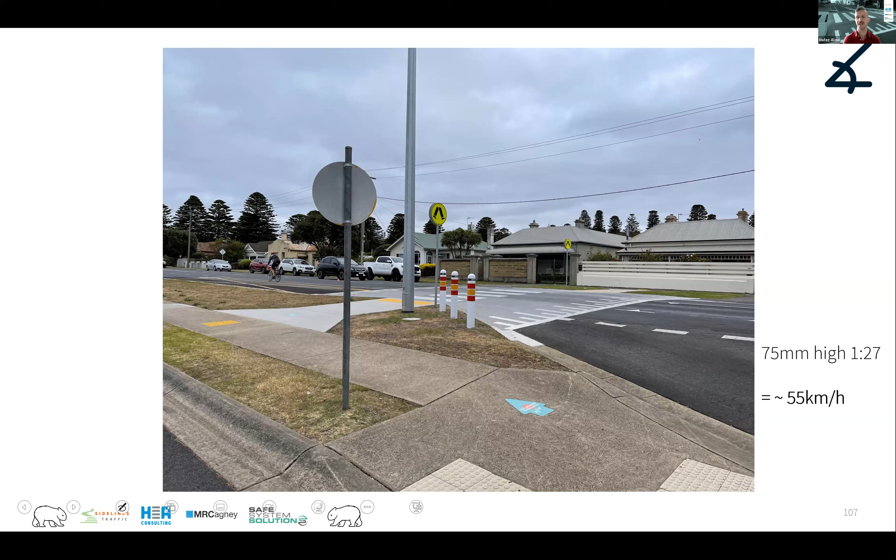Thank you. So Kartigesu, you mentioned raised safety platforms — this course is about raised crossings, but I would put a reference here for raised safety platforms as well. Thank you, Ken. The principles of the ramp grades and everything are exactly the same — it's all about slowing the vehicles down.

The second reason is that it elevates the user you're trying to protect, so they're in better eye line. And as Bridget talked about, it's easier to navigate if it's that continuous grade for pedestrians and those in wheelchairs and gophers and the like. But nonetheless, the cost of this compared to the cost of the full raised crossing is often leagues apart, and we get a huge safety benefit out of this. Plus, sometimes you just cannot do the drainage — it won't work with a raised crossing, but you can get it okay with this sort of stuff.

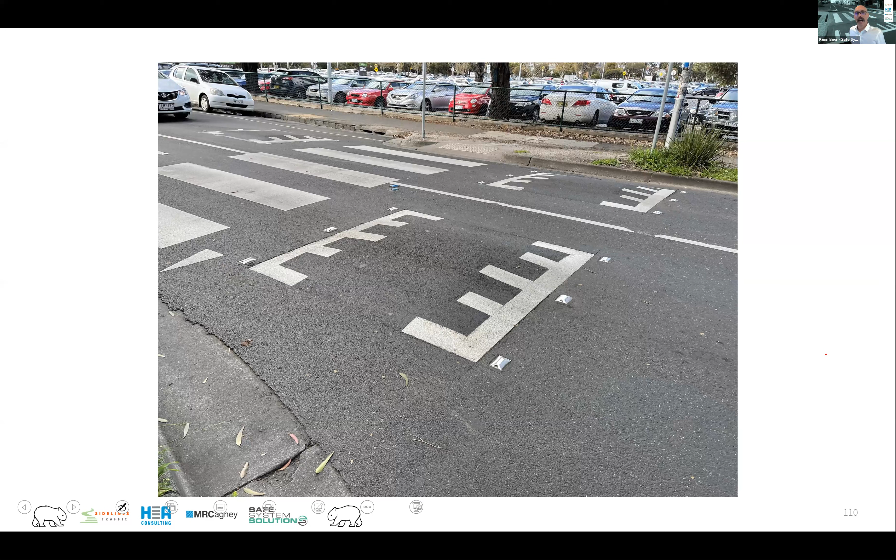So they're pretty good. All the ones I'm showing there are spike-down rubber ones, which you can just buy off the shelf. Plenty of people sell you those, so that's all good. But if you want something to last longer and better on maintenance, you can asphalt them in, and that's a really nice, long-lasting treatment that's going to be there for a long time. It helps out with some drainage challenges, and it's generally pretty good.

There's some standard heights and dimensions for speed cushions to ensure that a larger vehicle, predominantly our buses, can straddle them, while smaller vehicles are going to really slow down since it's a bit hard to straddle. So you buy them off the shelf, and that's what you're going to get, or if you're asphalting your own, you can have a look at that.

Ken, we've got a very specific question here, and I've sort of paraphrased it into two questions for you. What is the best design approach for a platform of a raised pedestrian crossing on a road with a steep gradient towards the crown? Should the platform be kept flat with varying ramp grades, or is it more advisable to design the platform with a longitudinal gradient?

I have one thing coming up that sort of starts to address that. If I'm getting the question right, we don't want to make our path for pedestrians or cyclists too steep either way, especially with horizontal grade, because people in wheelchairs will sort of fall out and those sort of things. We've got to be a bit careful with that. I'll come back to it, and if I haven't answered it properly, whoever asked it can shoot me an email, and I'll delve into it.

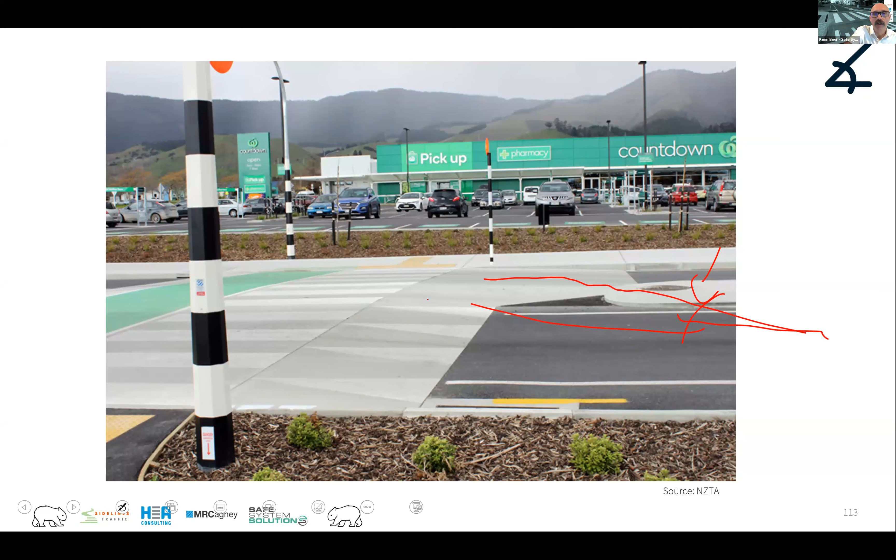Somebody mentioned also that you don't need to have ramp grades the same going in and going out, do you? The reason you do have ramp grades the same most of the time is because it's an undivided road - there is no splitter island down the middle. If you alter it, you've got these two different grades. You can see that this one has the island in the middle there. It means a vehicle coming in here isn't going to drift off and have one wheel on this shallow ramp grade and one on the other. So that's the reason why most of them are the same. But you can see that there's two different ramp grades here, which is okay, and that can help with the exiting of vehicles.

How am I going on time here? Okay, no, we're doing all right.

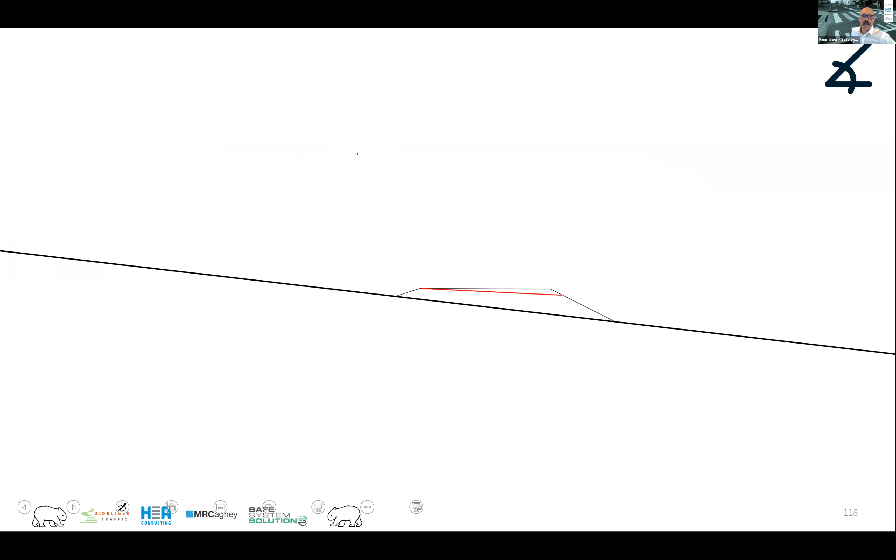You've kept your crossing flat, but that's not going to get vehicles through there, and it'll just get stuck on top - it'll perch up there. So I've exaggerated everything hugely here, just to give you the concept. But you can flatten things out to a degree and elongate out to get a better treatment. You start to really elongate sometimes to get vehicles able to navigate over it. You can get some slow-down features that are traversable back and forth for larger vehicles, within acceptable ranges for the angle of the crossing. So in that example, you'd be extending things out significantly in how you shape it coming out of that crossing.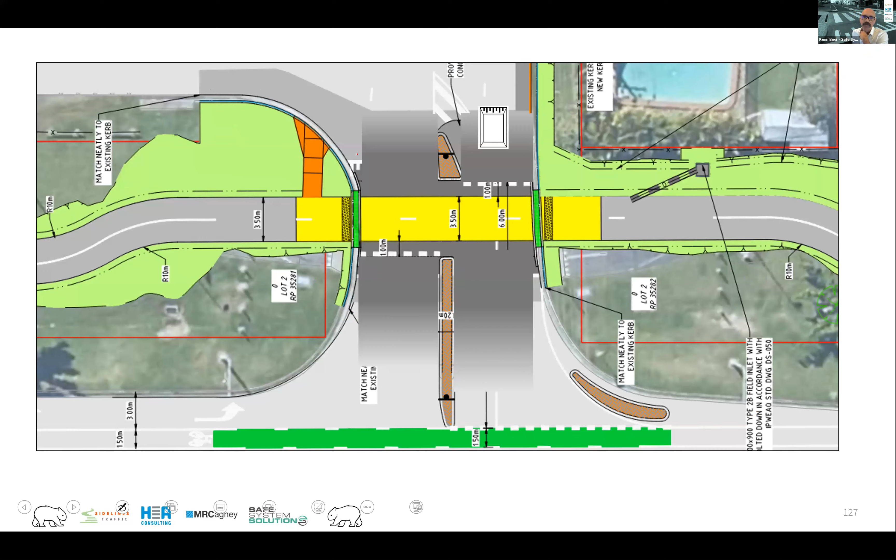So I've talked through sight lines and ramp grades, and to me they're really important things to think about for raised crossings - they have major impacts on the safety outcomes we get. I go into some other civil features here which I won't detail much due to time. I can point you to different documents, but I'll give you the high level principles of lighting, drainage, and the like.

AS/NZS 1158 is our Australian New Zealand standard for lighting for roads and public spaces, and Part 4 covers lighting pedestrian crossings. This doesn't differentiate between a raised crossing and a zebra crossing or a pedestrian crossing, and I feel there's some work to be done there, because excessive lighting requirements can stop us getting crossings in where they could be pretty safe. There might be an argument that at at-grade crossings lighting is particularly important, since vehicle speeds aren't slowed down and they're really reliant on clear vision of road users and pedestrians approaching and crossing.

But if you raise it, you're lowering the whole risk. You're thinking about lighting the pedestrian in two planes, but there's also the requirement to light the pedestrian so pedestrians can see each other when they're crossing - maybe for personal safety reasons, but you should be able to identify other pedestrians crossing. So the theory is a vertical plane and a horizontal plane where you're checking light - checking light at each of the points throughout, so that's about 1.5 meters up, checking there's light getting there, and then down at ground level as well.

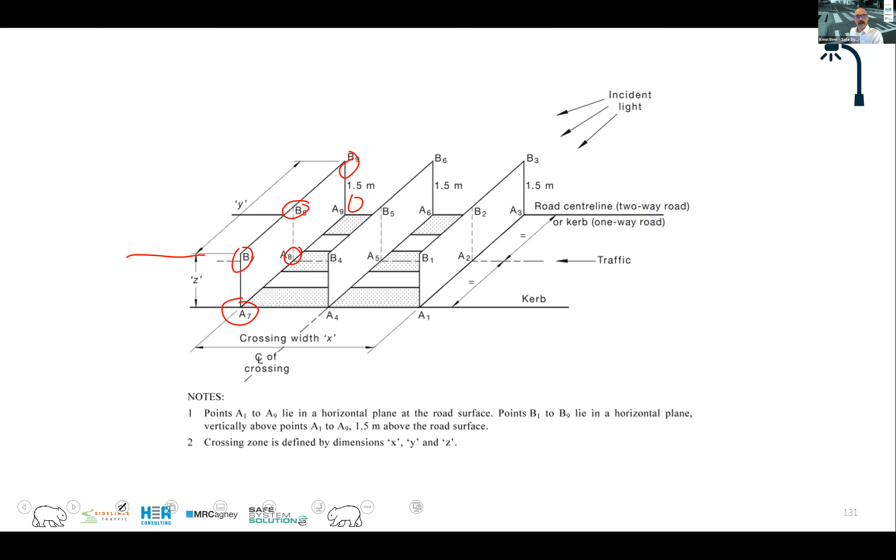In terms of those other crossings, we've got to think about lighting. You can see here TMR's guidance talks about lighting 10 meters back. I'd prefer you do that calculation and make sure lighting is all the way through the crossing as well, so an approaching cyclist is lit at a point a vehicle can see it. I'm not so fussed about lighting back here, because the vehicle has headlights, and the rider will see the vehicle approaching.

So lighting is often a huge challenge with these. As I said, I'm happy to share some of that information - I could probably drop it into the learning management system so everybody can access it. But drainage is often one that really inhibits the installation of raised platforms. It's really important for us to consider this and think of all the ways we can still get the principles and outcomes we're looking for, but account for all of the water, the deluge we may be dealing with.

Okay, so let's summarize at this high level what could be done. I saw this first one, keep the curb and channel, when I was out and about, and I thought that's definitely not going to cut it. Maybe the water's okay, but pedestrians won't be doing too well climbing down the curb and up the other side. The options we've got are a low ramp height, so the water will flow over essentially.

Positioning - if you can position a raised crossing at that high point, your water's going to flow either side. Now, don't position there if that's not pedestrian desirable. Don't let your drainage dictate that and expect pedestrians to walk 20 meters up the road - they're just not going to do that. But that is an option if things can align well. I'd love to see some of that thinking early on in subdivision design, all connecting together, but that might be a little bit too much to ask.

But then you've got the ability to ramp down and up within a distance, so your grades aren't too bad. I'll show you some bigger pictures of that later. Then you've also got the idea of a box drain or some sort of plate over, so you've got a drainage channel through. And then you've got your usual pit and pipe arrangements, expanding the capacity of that if you need.

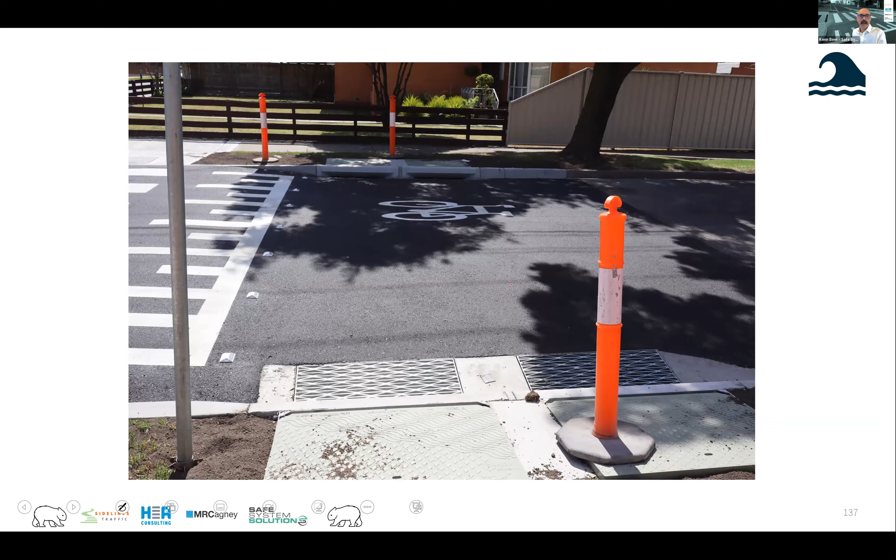This one I like a lot, and we're seeing more and more of it. It's where that sort of plate of some description is laid over the channel there, and we keep that straight access and water flows under. And you can see it there.

The challenges - and I'm sure some of you have faced this many times before - actually I got some good pictures before I get to a bit of a challenge. Nice setup there. The challenge is, like you see here, they need sort of constant maintenance and clearing, or ensuring that that's the case.

So here I am with my colleague Chris Hall, who some of you know, out there doing the post-opening audit of that, and that was only sort of 2 weeks after opening, and it already clogged up. So it needs attention, and it's just something to be aware of as one of the potential challenges to face.

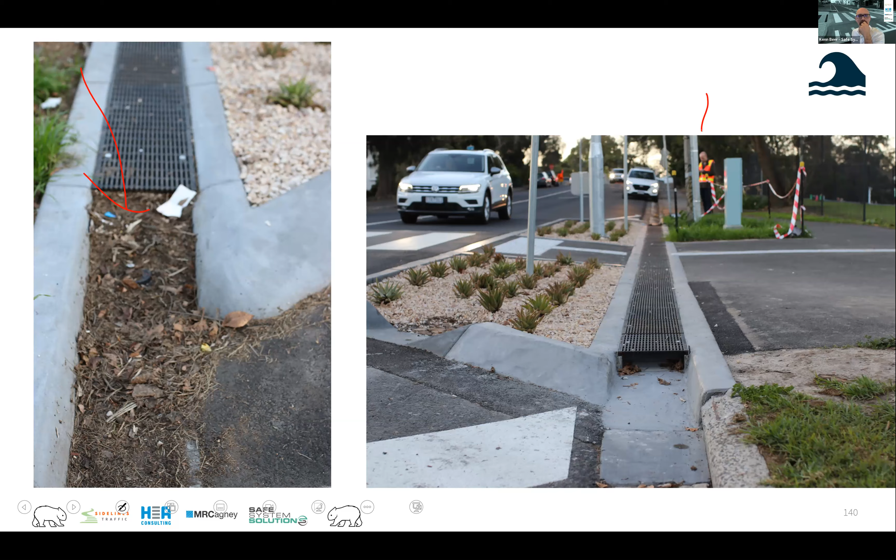Within that side is another interesting one - the idea of utilizing the curb outstand area vegetation to have some openings there, so your water can come in, drop down, but it also acts as a bit of a retarding basin or an area where you can even have a bit of water sensitive urban design and things going on. Again, even when you have these sorts of features, there are some leaf challenges.

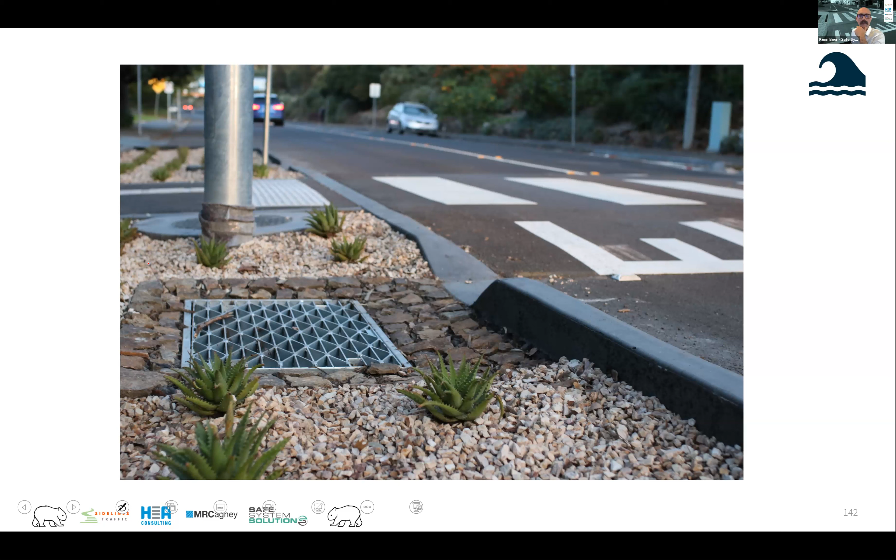There's that other one where you've got water that can kind of come in, go down, a bit of an area where it can take a small bit of time where there's extra water that comes in. So often a big concern around these, and it's something everybody does need to think about, is how steep can you have this?

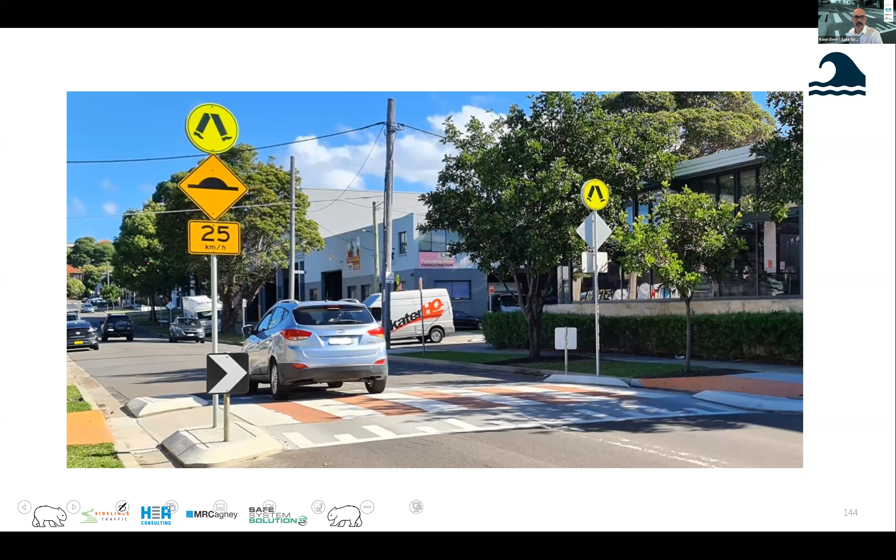But as you get more constrained and steeper, it doesn't tend to work so well for a number of road users, being wheelchairs or people on those Gophers, mobility scooters. And even older people start to have that challenge of going down and going back up. So this one's starting to get into the too steep range.

This one I scratch my head at a lot because - okay, it's not too bad. We've got this little curved lip and things like that. And I say, well, the amount of money that's saved by doing this rather than subsurface drainage and everything like that is big, and we can get more of these out there, and that's a wonderful thing.

The challenge you've got, as I said, is watching this lady slowly navigating down, step by step, trying to navigate up and get back on. So that change has been a problem for it.

But then again, we've got slow vehicle speeds, we've got people with a clear priority, they're going to stop, it's a safer environment. Don't get me wrong, the ideal would have been to have this all nicely flushed through, step-free and the like. But if the choice is between this and no raised crossing or an at-grade pedestrian crossing, I'll choose this every time.

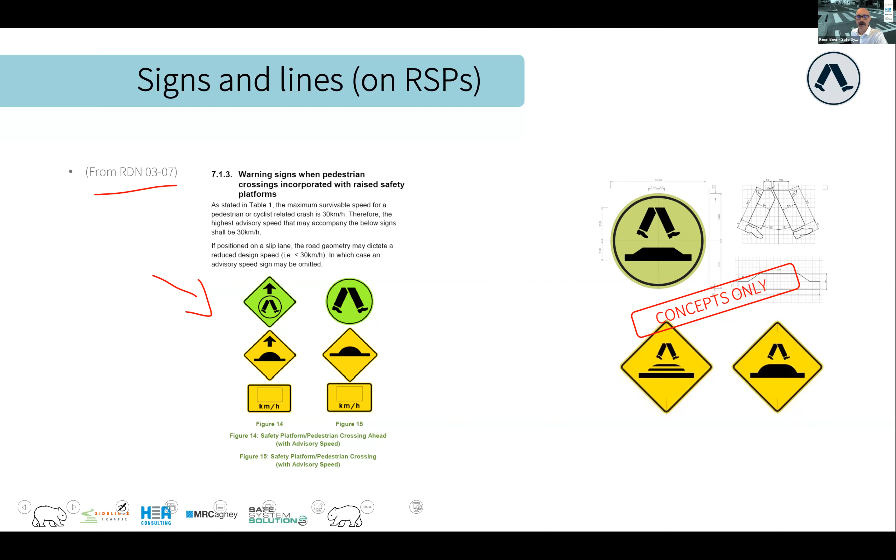So that's the sort of standard setup we've got from Road Design Note 03-07, this one. It's pretty good, we're using that sort of, well it's a very green one in that picture, but it's that fluorescent color. And I'm still promoting our concept of a regulatory legs and raised crossing sign of some description, which would help alleviate some of the sign clutter we have to put out on these when you're following that particular set of guidance.

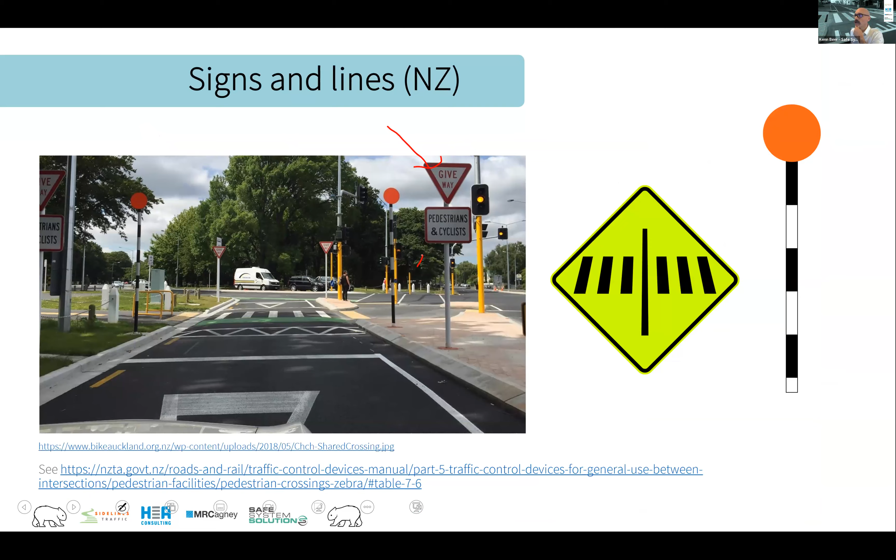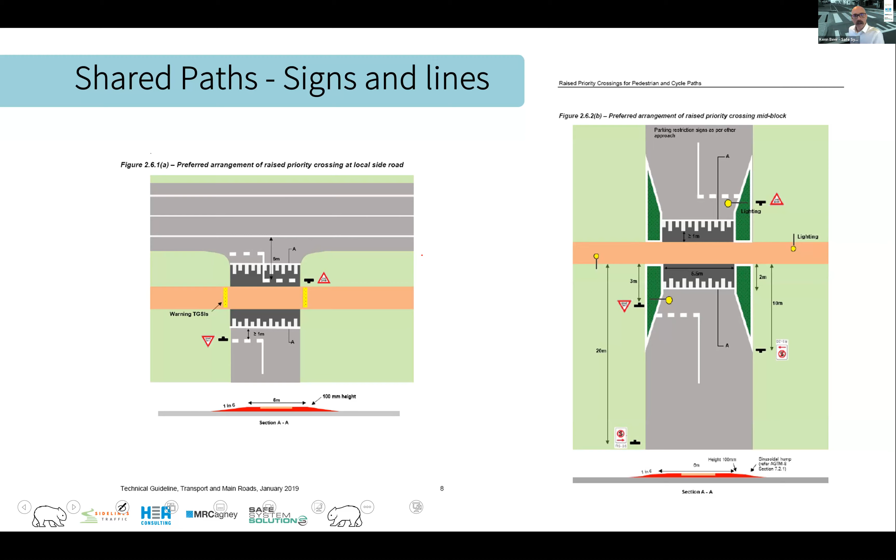And then when Australia does the shared path crossing, I think you've seen enough of it now, but you're creating essentially that road intersection style signage where you're giving a give way sign facing the traffic so that the vehicles can go through. And there's some of those specifics of it with the two pedestrians and cyclists to give way, advanced give way sign if you want to use it.

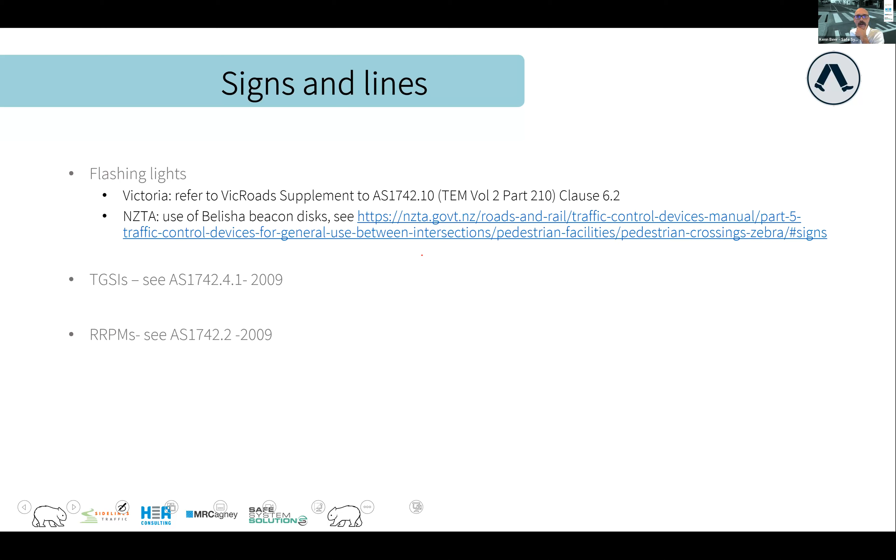Just a couple of things to point you at, which I'm not going to go through in detail. Flashing lights—there's information in there about when you'd use that. Tactile ground surface indicators, reference 1742.4 and 1742.2, look at those yourself. And I think I've covered enough of the shared path crossing signage and line marking, but Road Design Note 03-07 has good information if you're interested in that.

Just on that, one of the things generally being discouraged is red, and the reason is the information collected on contrast for some people with specific vision impairments. So try to stick to black pavement as much as you can with white markings.

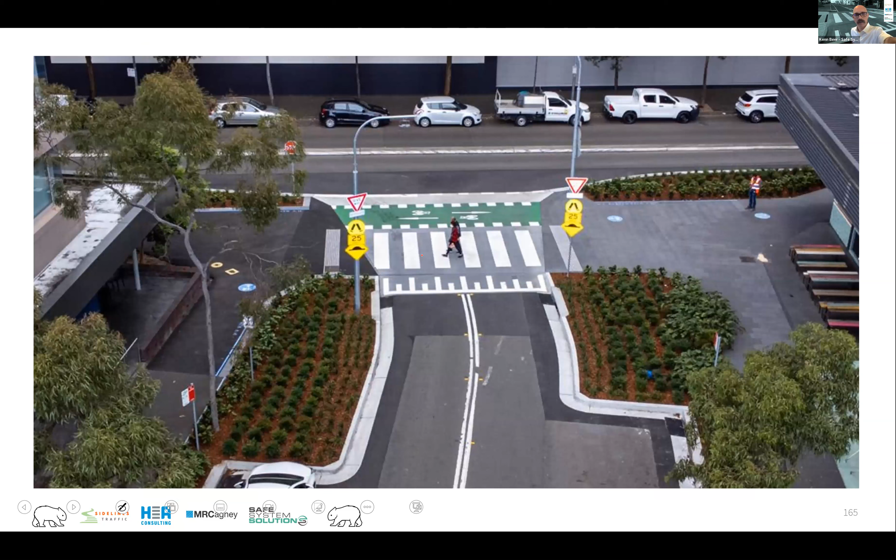I'm going to jump through that, but you can see quite a few signs put up there. The last one before I move into the learning management system was to talk a little about pavement—not much, really, and I'm not an expert in pavement construction, so I can't say too much more. But it is just ensuring that you box it out, because if you've got that nose angle and it's too thin, it'll just break away. So you really box out, fill that, and then you get your ramp grade from that.

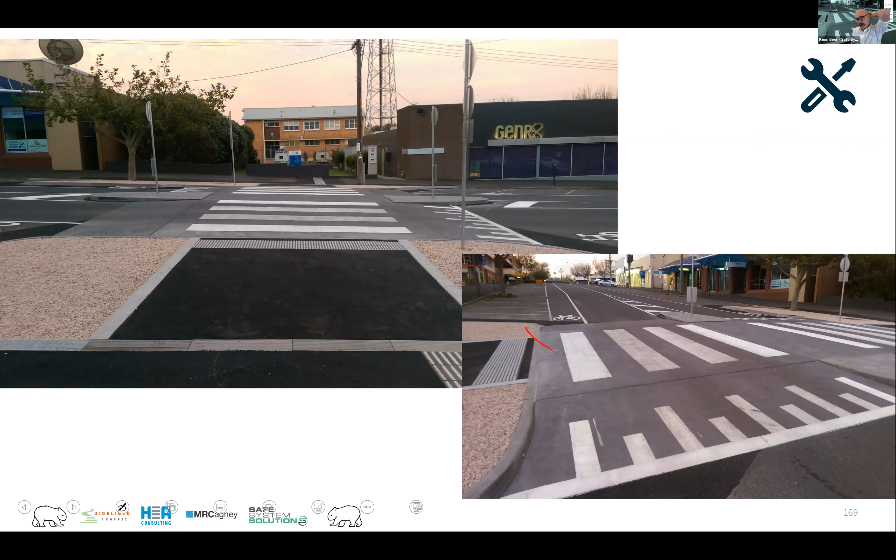Concrete is easier to get that ramp grade, although it's harder to construct, takes longer, and is more expensive, but it's a really nice option. The other challenge is continuing to maintain contrast between the color of the concrete and the white line marking. It's another factor and consideration you can put in there.

Okay, I think I better show the learning management system. One last question, Ken, from Grace here: do we have specific signage for raised intersections with pedestrian crossings?

Well, you'd put your raised crossing with your usual leg markings if it's a wombat crossing, like on a slip lane or something like that. If it's a signalized crossing with a pedestrian crossing, you just use the raised treatment because the signals handle the usual stuff themselves. As for asphalt versus concrete, I'll let others decide theirs, but concrete is easier to get your ramp grades and things like that, though it's more expensive and has that contrast challenge.